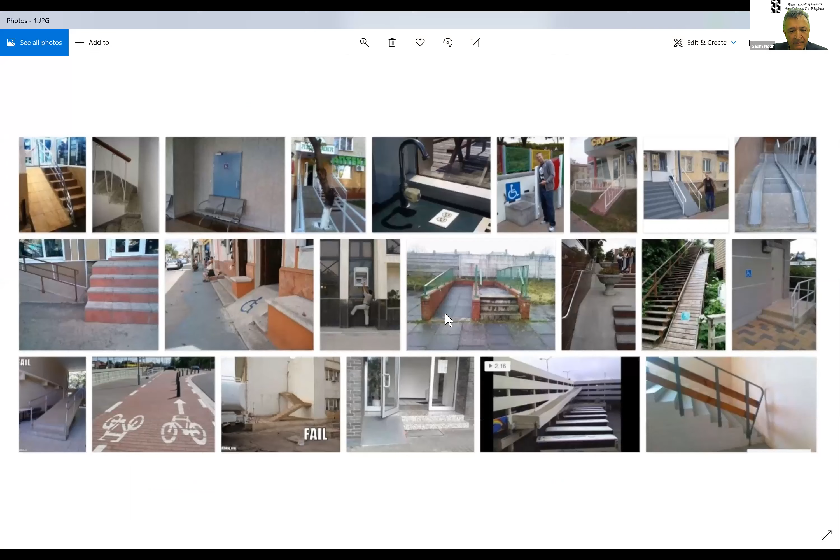I don't think we're seeing the slide you're talking about. Let me verify, I just pulled it in. Thank you for stating that - I'm going to see where I can do this. Share, oh let's go here. Let me see that. I think you can see the photos now. Yes, yes, that's better.

So anyway, these are just fun photos - I literally typed in 'mistakes or errors in construction' on Google Images and it gave me this. Hopefully none of us will ever be in this position, but it simply shows that it can be done.

Somebody will put a chair right in front of this fabulous spot, or you can see bike racks blocking things, creating impedance, and the door placed at exactly the wrong spot. This was my 'Stairway to Heaven' - wonderful slopes, etc.

So this was just one I had to show off, and another simpler one - sorry, Sam, you need to share your screen again. I'm going to find it and share it right here.

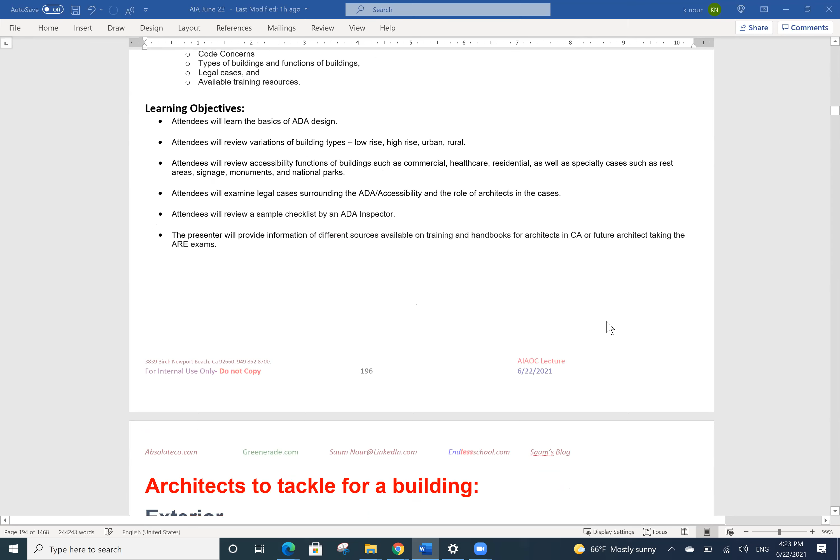Yes, but whatever you were drawing over, we couldn't see it. Ouch, I'm going to do another test. Let me do that because I'm going to be doing that. Let me make it.

Do you see this, the yellow marking? We see the yellow pen. Fantastic, thank you, thank you.

So anyway, that is the part. Then you go through the architects tackling issues on the exterior or the interior.

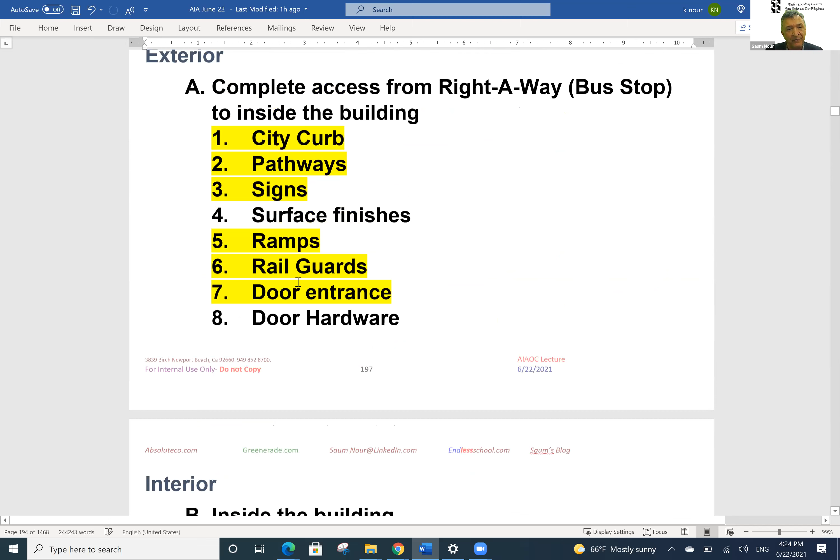There was a philosopher who said 80% of participation in a contest is just being there. So the number one item I'd emphasize is that a handicapped person who cannot drive gets on public transportation, reaches the city curb, and from that pathway goes through the signs, ramps, guardrails, and door entrances to enter the building.

That becomes a major issue. By the way, the word 'right of way' really means the curb. There's another issue in the code that says if you're doing egress path lighting, the engineer has to provide all the foot candles to get to the right of way. The right of way is not the exiting of the building, it's the bus stop. So really it's the street curb.

These are items I am going to be tackling today, hopefully finishing. Of course, surface finishes I am not tackling. There's a small statement about curbs that simply says they cannot be smooth, cannot slide, and have to have proper slopes, etc. The ramp we will be discussing at length, the guardrail at certain levels, door entrances, and door hardware.

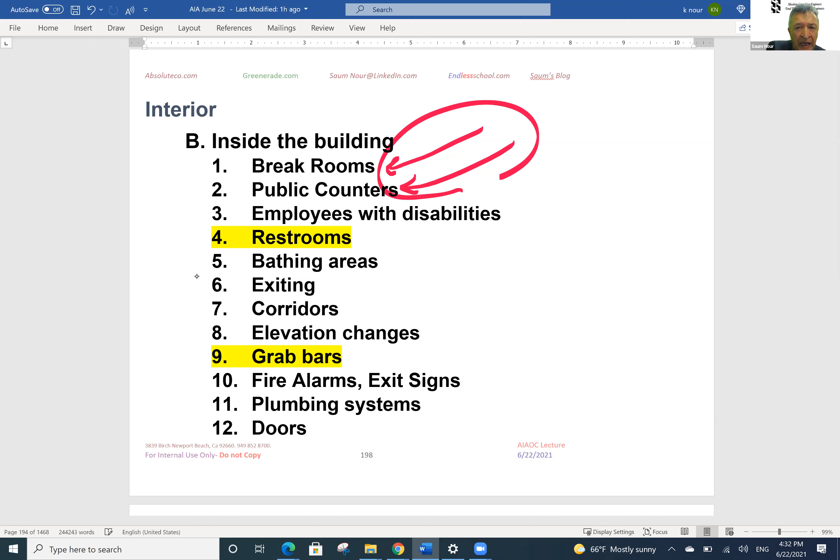Inside the building we have the break room, which I'm not going to address today. Public counters, there's two parts to this. I was doing Walmart for about 8 years, and when we were converting Sam's Club stores, one issue was a concept called equivalency.

Part of the equivalency was the following, however, I need to apologize, I had it backwards. It was Pace that became Sam's Club, and Price Club that became Costco. So when Pace was converting, all those stores were already there.

The issue was, what happens if they hire a handicapped accountant or a wheelchair user who becomes a supervisor, and they couldn't provide access on the second floor? We were building small rooms on the first floor, simply saying if they ever hire a supervisor or accountant, here it is, we now have that proportionality built in. Or for counters, we were adding a small counter for anybody who was handicapped.

They would guide them to that particular counter to do the transaction. Or like many bathrooms or gas stations, where a sign says if you're handicapped, please honk and somebody will come give you service. So those are the elements.

Employees with disabilities is a very touchy-feely issue, and very scary for many, especially at the corporate level. I don't have a picture of this story, but it's on my wall. ABC on Mount Wilson has a tower. They had an individual fixing the towers, and by the way their tower is one of the longest and tallest. I've done literally 1,500, if not 2,000, cellular towers in different formats and places, and this tower was very unique.

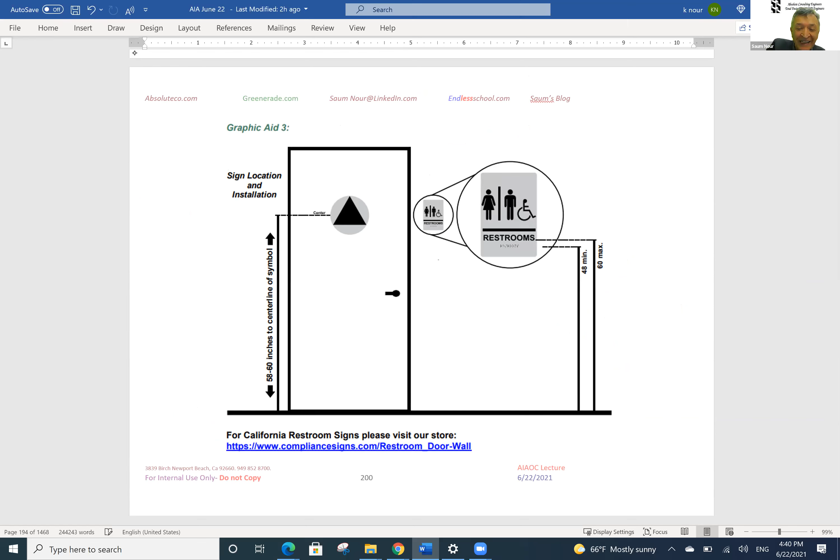But overall, one of the most critical parts, as we all have, is what we call standards. Standards is something that a guy who is here versus Minnesota versus in different states, we all follow the same guidelines. Of course, for example, the state of California doesn't do ADA - we do accessibility through chapter 11A and 11B. So just know it, we do not do ADA because ADA is the standard that federal government gave, and they tweaked it into 2010, et cetera. But again, we follow the guidelines of the state.

So one of the corrections that we see from the architects is that someone says, you're not doing ADA, please take the word ADA out - you're doing chapter 11B or 11A for state of California. So at least let me stay with the following: if we are doing something in Marina Del Rey, or if you're doing it in San Diego or Northern California, we all have the same standard.

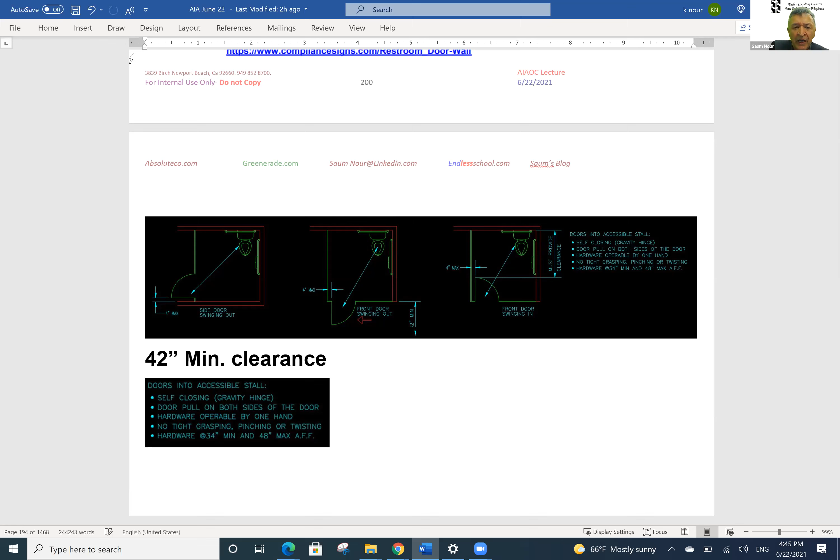So there are guidelines. Now what I did was the following: I took some items, this is for restroom sections, and it simply shows a partition - I don't have it here, I have another one for a single restroom. And again, every time you have the water closet placed inside the restroom, they are always opposite - the door is opposite of where the water closet is.

And then of course, when dealing with doors into the accessible stall: self-closing, gravity hinge, the door pull on both sides of the door, it can go both ways. The hardware operable with one hand, no tight grasping, pinching, or twisting - remember that. The hardware is about 34 to 48 inches, and those are the guidelines. I'm going to continue to repeat that, just make sure we all learn those 4 items. And again, don't forget, if we all live 100 years, we will be in that position.

And again, in this particular case, I'm going to be looking at this thing. The 4-inch maximum is the position you could be swinging through. I'm just giving you the 4 positions you could have - I just enlarged it for an FYI.

Now the other item I'm going to emphasize here is as follows: when you come in, there's a wall hung and floor mount. If the toilet is wall hung, 56 inches. If it's floor mount, mind you the actual drainage is here, that gives you that 3-inch with all the elements. So you got the 56 to 59, just FYI.

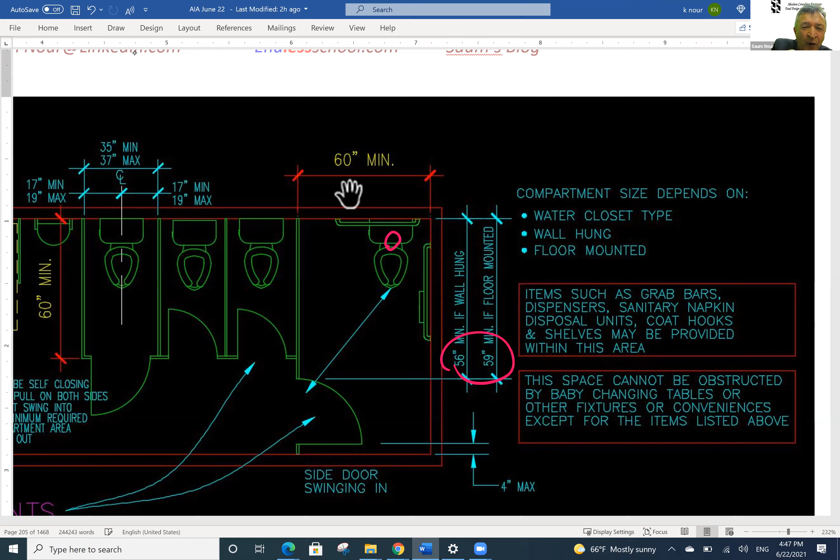The issue - let me open up a parentheses - if it's wall hung, God bless you, make sure this is an 8-inch wall, minimum 6-inch you will squeeze that, very very difficult. But if you do put wall hung, especially on an institutional level, the beauty is the pressure system is far better, etc. If you have the tank type, God bless you, just watch out with the pressures and other elements - this is just a parentheses from other trades I know. But at the end of the day, water closet type, wall hung versus floor mount - if floor mount, remember the 3-inch added to the 56. So those are the 3 items.

Items such as grab bars, dispensers, sanitary napkins, etc. may be provided here. You don't have to, but grab bars are mandatory, and some items can be there, I have a detail for that. The space cannot be obstructed by baby changing tables. This came about because now they have changing tables in the men's toilets too, whereas before it was mostly in the women's. But now that you have it, you want to make sure no other elements can obstruct this area - this area is sacred and must be maintained in that format.

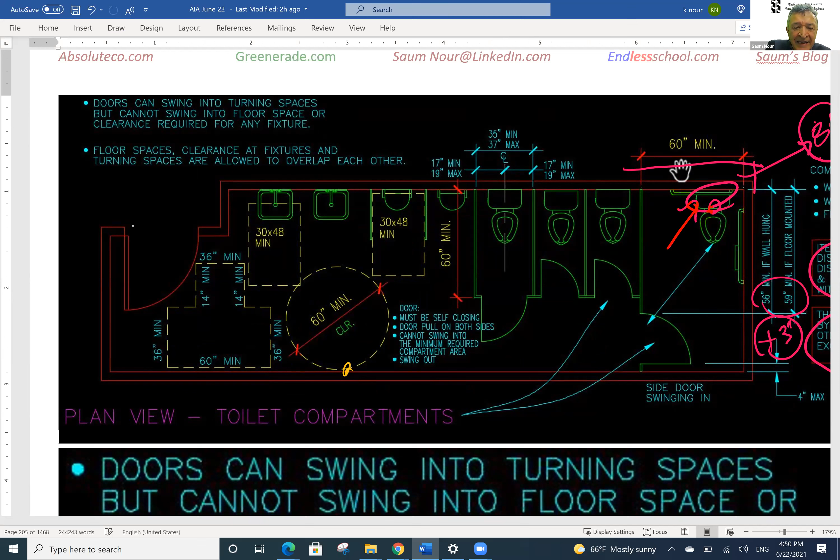Yes, one is your 60-inch round, or you have this particular shape where 36 and 60, you could have either shape as an acceptable turnaround.

The two areas you have is that you really want to make sure these clearances cannot be impeded. At the same time, you are allowed to have a 12-inch overlap of this door with this turning space, and you'll see another slide on that. The doors, again, must be self-closing, pull on both sides, and the swing cannot be within this compartment. This is your compartment area opening. The door must be outside of that, and we go from there.

I'm just going to repeat some of these, only because I wanted to make sure I emphasize these geometries.

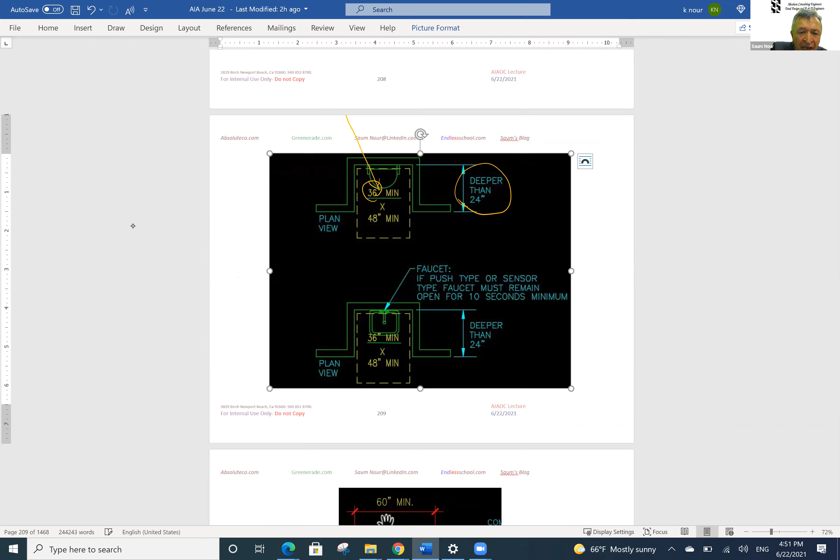Between the urinal and the lavatory, it is 30 by 48 and cannot be impeded with any other clearances. The only issue is if this gets deeper than 24 inches, you have to adjust that 30. That is the modification, just in case you have an odd position, and that would be true for both urinals as well as lavatories. So if it is recessed deeper than 24 inches, you have to go through that.

Now, the faucet, if you have the push type or sensor type, it must operate for 10 seconds. This is a little plumbing issue I just added, just an FYI. By the way, that does not hold for residential.

I just got a plan check correction from San Diego on a residential project, and they cited this metered section. That's only commercial. Some of that is from the green code, and some of that is from the accessibility side.

I'm again repeating this: the 4-inch is always in the opposite direction, 56, 59. Remember the 3-inch, and if you're taking your ARE exam, this ADA reference shows up in quite a number of places.

Now, all of the accessories - there's one item I want to bring up. This grab bar right here has its own sacred components. Again, minimum 33 to 36, and mind you it cannot be lower than this. It would be almost... I don't know what word to use... it would be almost wrong if it's lower, because technically it would obstruct the actual tank.

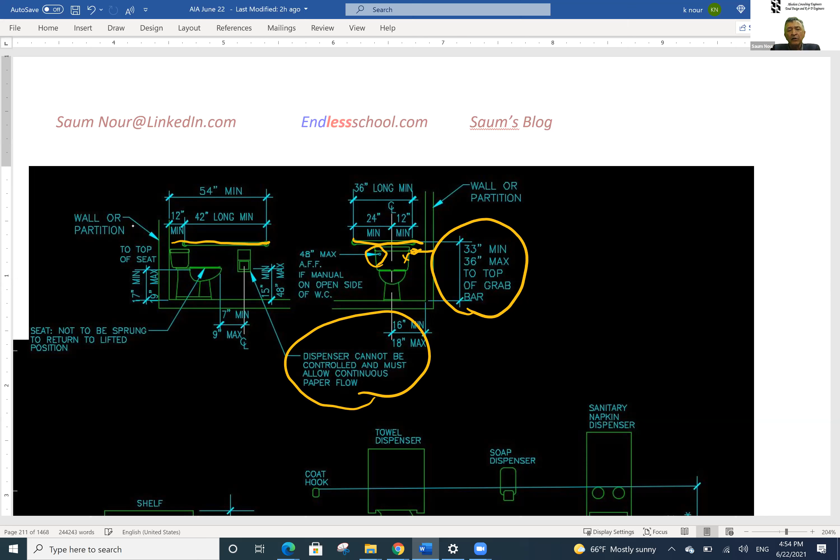The dispenser control simply cannot be controlled and must allow continuous paper flow. That's one issue, and when they are using those giant rolls, I would literally quiz them on this - when the paper roll is extremely large and not being used, it is very difficult for a handicapped person to use, especially on an institutional level. I have seen that become an issue.

This right here, there is a problem. This simply says it has to be a minimum of 15 to 48, but it'll conflict with the handrail, so really you'd better stay within that region. The other item is 7 inches to a maximum of 9 inches - it becomes a very interesting issue.

One more item for you: this simply says 17 to 19 inches. In one of the cases I visited, the following happened - the architect of record comes back, here's the face of the stud, right? FOS. There are no finishes here.

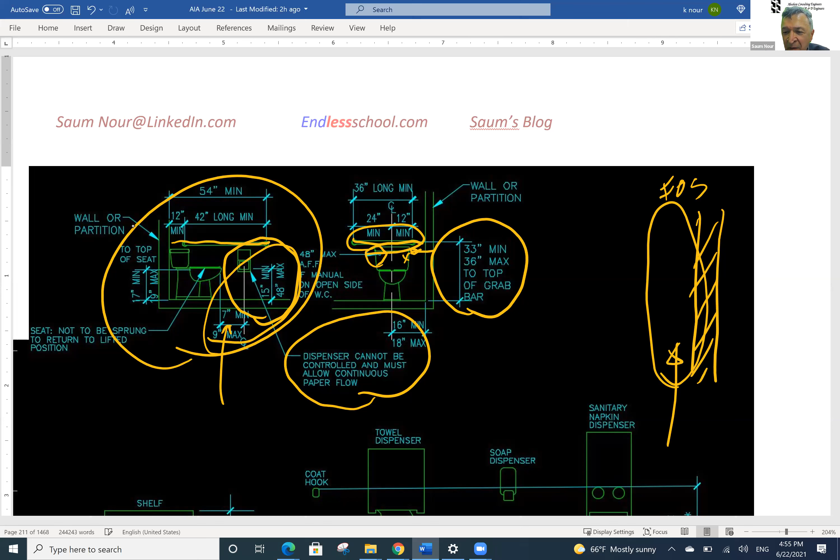Mind you, I am a son of a stone man. All I can say is, depending on what finishes you have, this can grow and grow and grow, depending on whether you have a 2 cm marble or a 3 cm marble, a very light veneer or a very thick veneer. I have seen this go from 17 inches to...

you'll see this right here actually simply just go bye-bye. We did this with an architect, we were working on a high-rise. They had the veneers there, and they simply added on top of the veneer. All of these were against the code, and they had to go back and redo all that work back to the face of stud and build it out. So please, watch out.

And we have seen that quite a number of times. Since I may not be doing the break room, I'm going to bring up a case that I got involved in. Here is the 34-inch countertop, and here's a dishwasher, and here was the floor. This floor was a bare concrete floor. They were able to make this dishwasher go. By the way, there's only 2 dishwashers out there that you can actually have for a handicap dishwasher - one is the GE and the other one is Bosch.

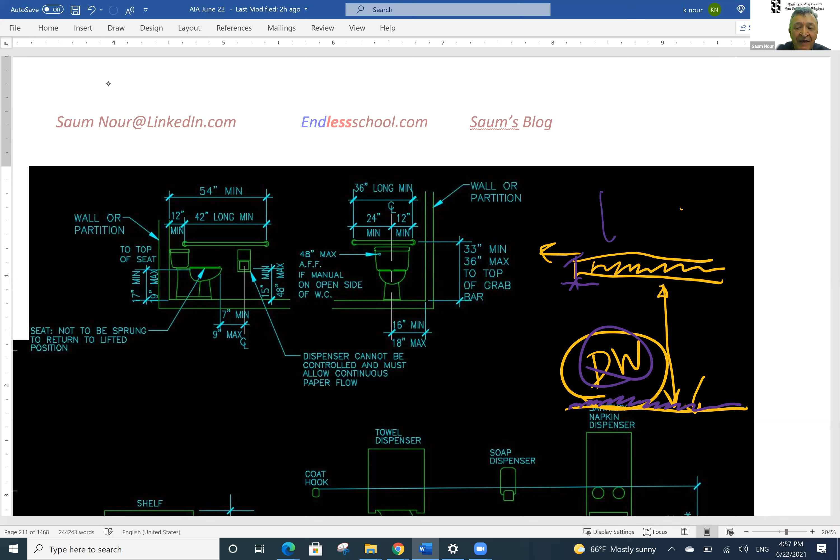Guess what the contractor did? The contractor went out and simply put tiles here. Then this dishwasher, no dishwasher was able to get in, because this 34 is very, very tight. By the time you have those finishes in, it's very, very difficult. That was a monster headache for the contractor - they had to go back and do it. Anyway, this is a little parentheses of a case that I had seen in one of the high-rises.

Okay, so we talked about all of these wonderful stuff. There's one item I'm going to bring out. I know all the architects have these boilerplate details, and they just slap it on there. Please, if you do, modify your details and simply state that this is from the finished surfaces, or whatever these surfaces are, because you've got thin grout, thick grout, etc. Just an FYI.

The other thing that I really like is as follows: when you have bathrooms, please use the continuous grab bars, because if you do that, all these distance issues go away. We did 54 floors of verification, and in many occasions, when we saw this, we knew. When you don't see these, you had to go and measure it, because this comes from the standard.

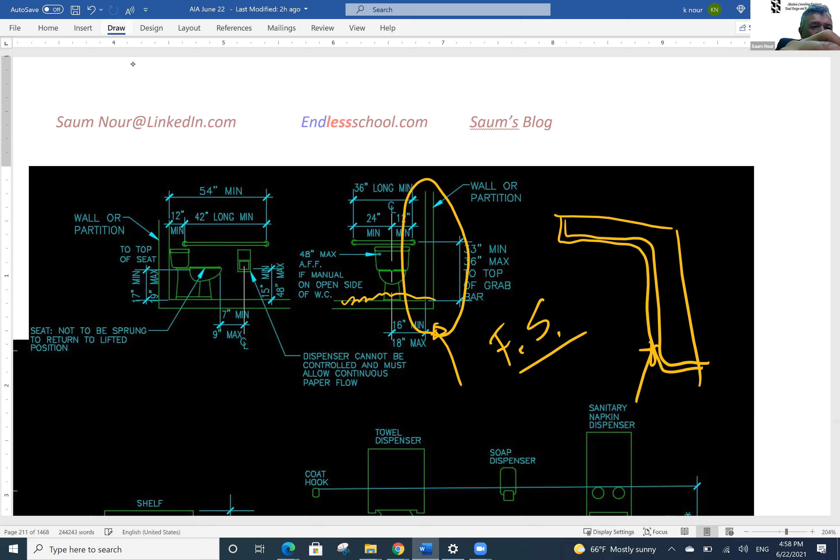I'm going to apologize, I'm going to give you one more quick shout out. Please, the bathrooms - they make the assumption when the bathroom fixtures etc. are made for a 350-pound person sitting on the stool, or about 300 pounds of pressure going on these grab bars. Of course, you have another section of the code that says on a railing it's 200 pounds of pressure.

For the sake of argument, if an individual is 300 pounds and he's pushing his hand onto that grab bar and pulling himself, imagine he has an arm, and the moment that he's causing is whatever his hand distance is plus his weight. Imagine how much moment he is putting. If those of you who've done AREs would know, you're putting a ton of moment. Please do not allow that small little number 10 screw that goes into this.

And there's only 3 of them. If you have seen it, it's right here, and that comes off. Generally it goes through all of these finishes, veneers, and by the time it grabs the wood, the lumber is what we call poco, very small. And you can see all of these go bye-bye.

So please, as an architect, change your details. Again, when I am in the bathroom, I have nothing else to do but observe all these issues and problems. So that's one item. Please do not have, or if you do have those boilerplate specs, please modify them or enhance them so that you do not have those issues.

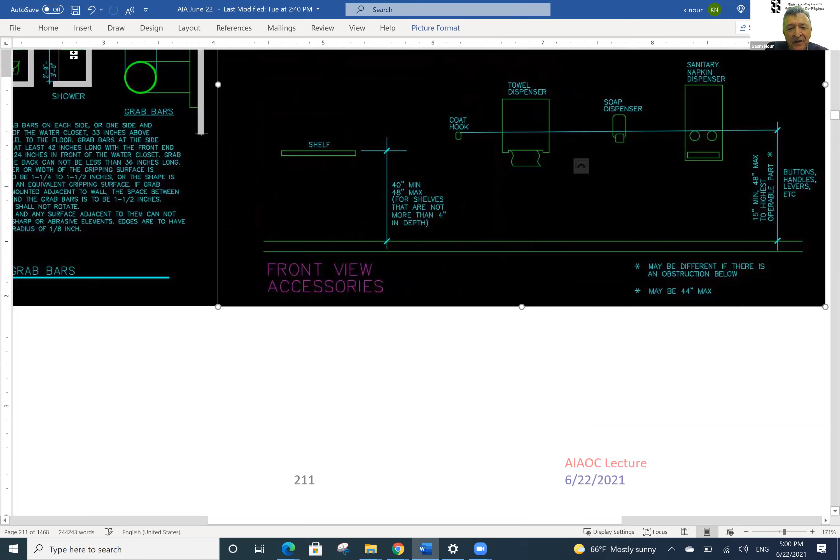So now, these are the other elements which are out there - the sanitary dispensers. Sorry, I'm having fun with my very sensitive mic. Okay, what is happening is as follows: they actually try to discourage you, but again, remember the 48.

You really want to stay away from these issues. If you've got towel dispensers, soap dispensers, coat hooks, and all these shelves, you really want to stay away from those. The only part that actually gets me is this right here: if you are within that boundary, you cannot exceed beyond 4 inches, just an FYI.

Now the grab bars, you really don't have that much choice. The grab bar, whether it's on a staircase or handrails, etc., is the same code and it does not make any difference. I'll just read it: locate grab bars on each side, one side and the back. The water closet grab bar is 33 inches and parallel to the floor. Grab bars are to be 42 inches long and so forth, and they do allow 1 1/4 to 1 1/2 inch diameter.

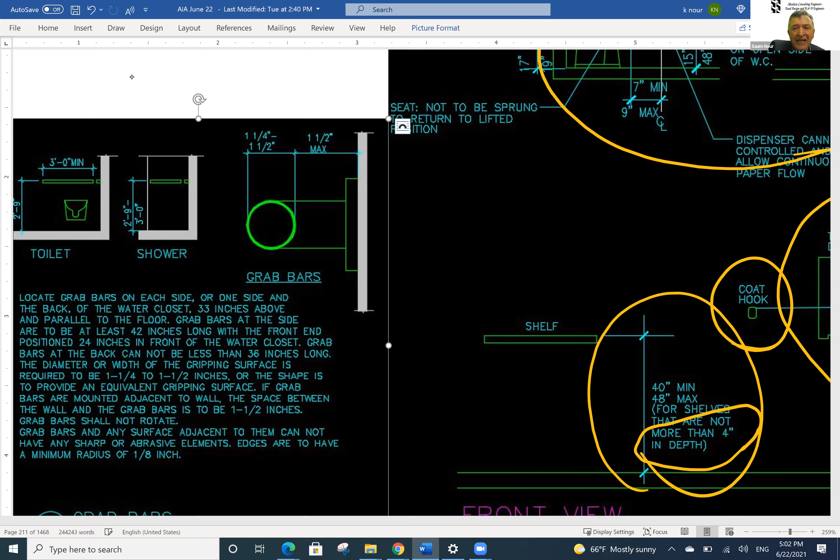Just an FYI, there was one item I'm going to go back to, which I did with another case. I'm going to revisit this for a few moments. But anyway, these I've already explained, and I'm just repeating myself here, and this upper part of the slides was also repeating. I'm going to go to this one right here.

What's happening is as follows: if you have a lavatory, for the sinks, the plumbing industry has already addressed this. The sinks actually have the drainage offset, not concentric or right in the middle. Just FYI, I'm not going to discuss the break rooms right now, but I know one manufacturer offset it and everybody followed suit, primarily so that you can have this area intact. So that was one part.

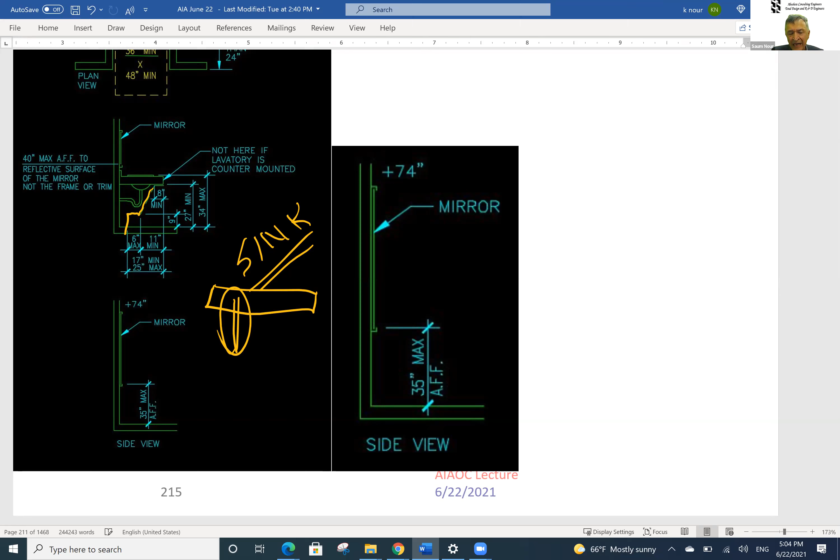The other issue, which I'll bring up now, actually applies for the sink as well. The ANSI standard simply says all of these, for when an individual is going in with a wheelchair, have to be protected. I have several samples - I work with a manufacturer on this issue, and they have to meet certain requirements. I'll give you one example.

Let's say you have a cold water pipe. Should you wrap the cold water as well as the hot water? The question came about because if you're in a rest area in a very cold climate and you have bare skin, you touch that cold pipe and you'll get frostbite. Of course the water's not frozen yet, but it's very cold and it'll hurt the individual. So when you're talking about protecting the underside of all the pipes underneath the sink, you want to make sure you have that for both hot and cold. Hot is obvious, cold became obvious if you have a restroom.

The other issue is all those sharp edges and elements that the plumber leaves - you do not want to get cut on those. So they have protections for those. Now there's one item I'm going to bring up again.

Forgive me, I actually went to ICC in Baltimore for a factory visit. There's ASTM E84, which I highly recommend everybody have for all these protective elements you see here. ASTM E84 is the same thing as the 25/50 standard - for all the elements in corridors, it measures the burn rate and smoke rate of materials that burn. The reason this matters is there are two groups of philosophies: the code simply says ANSI does not elevate and bring in ASTM E84, so there are two groups of thought in this process, and they're fighting each other. By the way, ASTM E84 does not add any cost to the material.

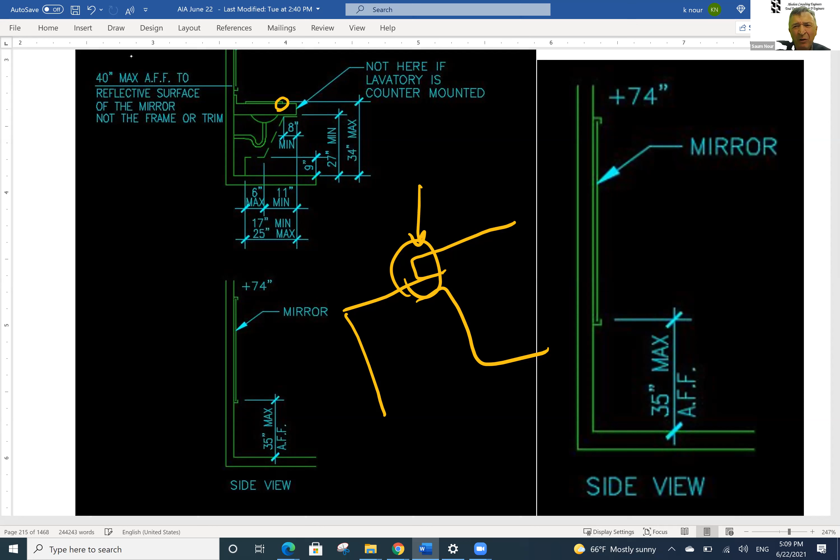I'm going to bring up one word. I do about 3 court cases a year, maybe, and sometimes we never go - by the time we are done, it never gets to court. It's called error and omission. What is an error? Simply, you made a mistake. You put the 34, but you put it in the wrong location. What is omission? You simply don't have the 34, and the guy is on his own. So remember, error and omission.

Now there are many, many cases - you write specification books, etc., and there are many, many dances you do to protect yourself. But the issue is the guy will simply say, you are the architect of the record - someone with a South African accent many, many years ago in court asked me that question, you are the engineer of the record. So if you are the architect of the record, show me that you knew this right here. You are the architect and you recorded this, you drew this so it can communicate between you and the contractor. Or did you simply omit? Each one carries certain penalties and you have to dance around those issues.

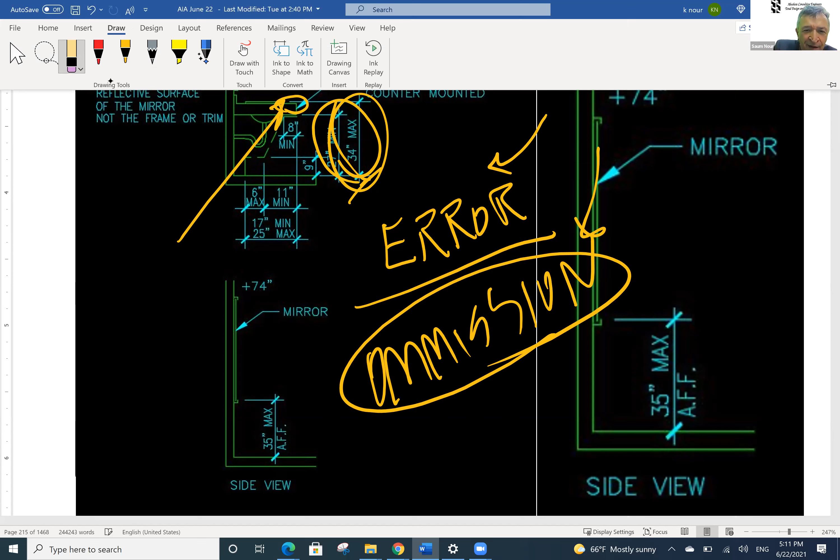But I'm just going to give you the following: that the 34 is top, now top of the actual china. Now, if you are putting the mirror, it's actually to the top of the reflective surface.

So as you know, there is a J hook. I'm actually putting mirrors in my house, a ton of it. If you see the J hook, this is approximately 3/4 of an inch, and what they do is put a little rubber gasket, and that's where it sort of hides. By the way, the rubber gasket is for two reasons. One, during an earthquake this thing can start shaking because, again, for structural reasons, since it's a solid brittle element, code says you can only have that much deflection. So you're bearing that deflection inside that rubber gasket.

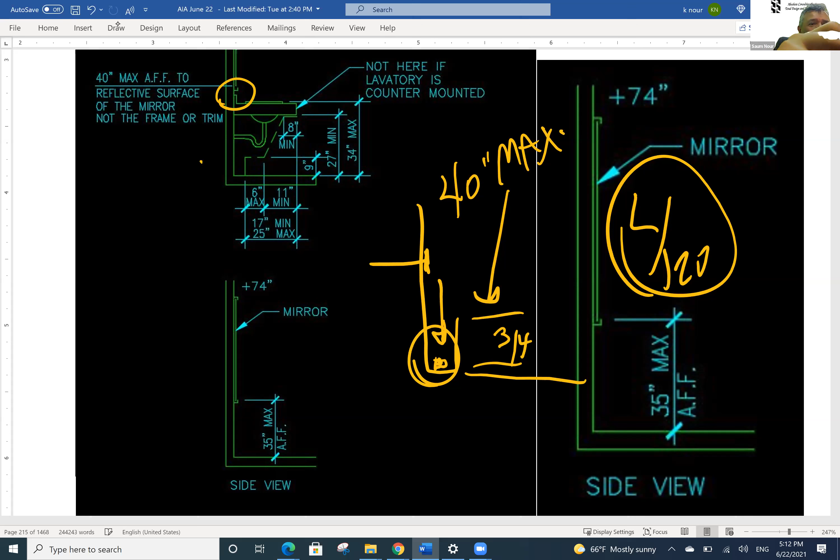But again, don't forget, this 40-inch maximum is from there. So if you put the 40 inches right here, you're going to be in trouble. So just remember, error and omission - did you have an error or did you simply forget? Just an FYI. So now that we are there...

The other issue - I'll go through this in a moment with all those dimensions - is, what about a wall-mounted mirror? Technically speaking, California Chapter 11B doesn't have something specific, but it is for locker rooms. So again, the code says you have to follow something, you can't just wing it. I mean, you can start from 2 inches above finished floor, but 35 inches, that's really on the locker room side, but the ADA actually has it, and everybody is following this - again, measured from the reflective surface.

Now, the reason I wanted to expand a little bit on this issue - there are fancy bowls out there. I was just looking at a home in Newport Beach. There are fancy bowls - watch out with that, because those fancy bowls, if you are going to be there, don't get trapped.

At the end of the day, that ADA person that needs accessibility needs those fancy bowls that go here, and by the way, there is no overflow required. Just to let you know, overflow is not mandatory. Those fancy bowls do not have overflow, that's not mandatory. So again, you have the faucets and all those elements.

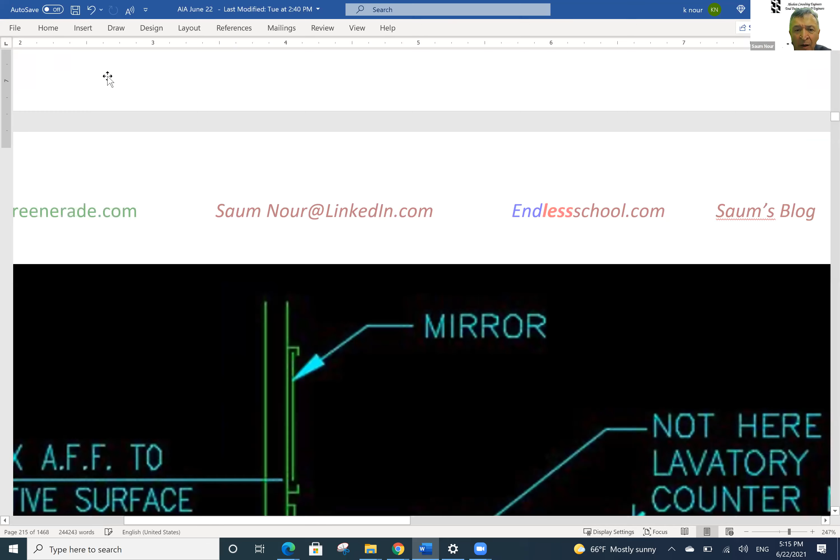Okay, I'm going to move on. I could talk about this more, but I only have 30 minutes before I get to the errors and omissions. And again, this is a blow up of that, I just placed it just in case.

Okay, let me talk about urinals. By the way, here we are not talking about the plumbing fixtures. We have the opportunity when we get there, if not, we are not going to go there for now.

But at the end of the day, if you do have the urinals - mind you, I wanted to take photos of all the variety of the bathrooms that I saw throughout for COVID. That was very, very interesting, just overall, just to let you know. But urinals was one of them that was there.

And you know, let's say for the sake of argument, you were in Home Depot. There was no consistency between all the bathrooms that you were in at Home Depot, or consistency at Walmart, etc. Those were most of the stores that I was visiting. But the one part that you have is the following: at no time, if it's a floor mount...

I made a boo-boo, we end at 6:30, I think - anyway, I forgot, I have to look it up again.

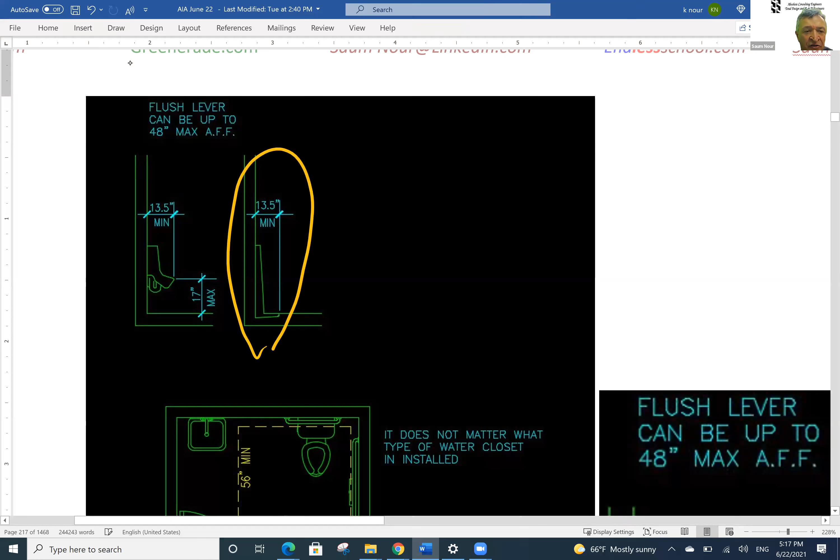But overall, what is happening is as follows: we cannot be less than 13.5 inches that it protrudes outside of the wall. And don't forget, many times these veneers that you have here, if you are going to be changing the elements - especially when I saw the water closet urinals were becoming waterless, I saw an abuse of caulking, it was a mess. But at the end of the day, it cannot be more than that. The maximum for a wall mount was 17 inches, just an FYI.

The Ebola outbreak caused most of these products to be touch-free, and right now touch-free, because of COVID, has actually become more and more common. And there are other issues on touch-free which I will not get into.

But overall, the boundary of this water closet is 56 to 60 inches. As a sacred rule, it does not matter what type of water closet it is, that 60-inch or 56-inch applies. The only issue was, if it was a floor mount, it was 59 inches for the clearances. But overall, that's one of the elements that they wanted to portray.

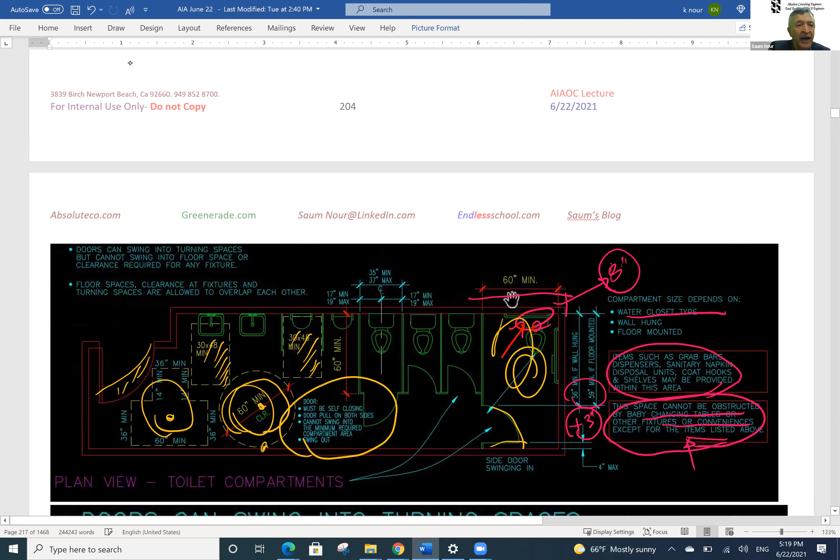There was a high-rise that I work in downtown, and that high-rise was made LEED Platinum. It was the first high-rise before City Hall became the high-rise because of the beacon they put in. I made it Platinum, but one of the issues you have—for God's sake, I was there. I've been there for about 18 years.

All of a sudden there was a correction, and the correction is as follows, I'm going to state it: if you have 1, 2, 3, 4, 5, 6 fixtures, lavatories do not count. I'm certain some of the 40, 45, 46 members know the answer, but I'm going to question it. If you know it, wave hands. Know the answer. The question is this: what happens to the sixth fixture?

Now mind you, if you're in a women's bathroom, you're all water closets. In this particular case, you've got 2 urinals and 4 water closets. What happens is as follows: the 6th one has to be considered as ambulatory. It's a very interesting phenomenon.

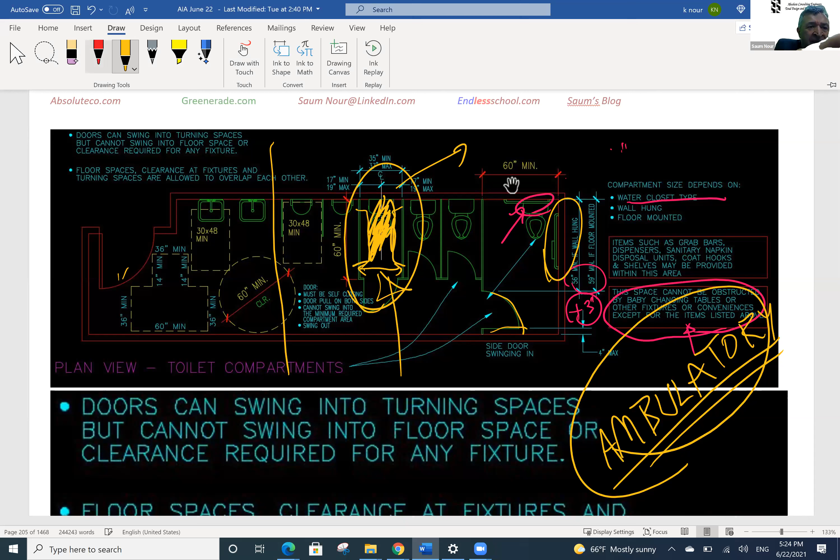And again, I really, really beg you: please go to the ADA, Department of Justice website where they have done all of this. Verify that if an individual comes through with crutches, how many steps the guy has to follow before actually using that—it's really, really intriguing. And what happens if you miss one of those dimensions or one of those items?

There's one item I'm going to bring up again: in the United States, American Airlines has realized that the weight of individual passengers during COVID has increased by 8 pounds. Just an FYI, I learned it today. So they're actually increasing their verification of the weight of carry-ons, etc. They're checking because they have to spend more money on jet fuel for 300 or 152 passengers times an average of 8 pounds—they have to carry 1,000 or 2,000 pounds extra weight of fuel. So either they have to increase capacity or charge people for it.

There was an occasion I was coming back from London, through British Airways, and the guy weighs my bag and simply said—I literally had an artificial arm inside that bag—and he says it's too heavy. I said, not a problem. I took the bag out, took the bag, wore my artificial arm and said, okay, now it's light. He didn't know what to say. He was just numbed.

Just an FYI, that was one issue. Before I go to the next slide, I was getting an X-ray for my teeth, and as the guy puts the shield, the lady says hold this one with your left arm. And now you've got all these, and I couldn't tell. All of a sudden - anyway, the lady was apologizing for about 30, 40 minutes because he didn't see it. But overall, that was the ambulatory cases. That was something that we had.

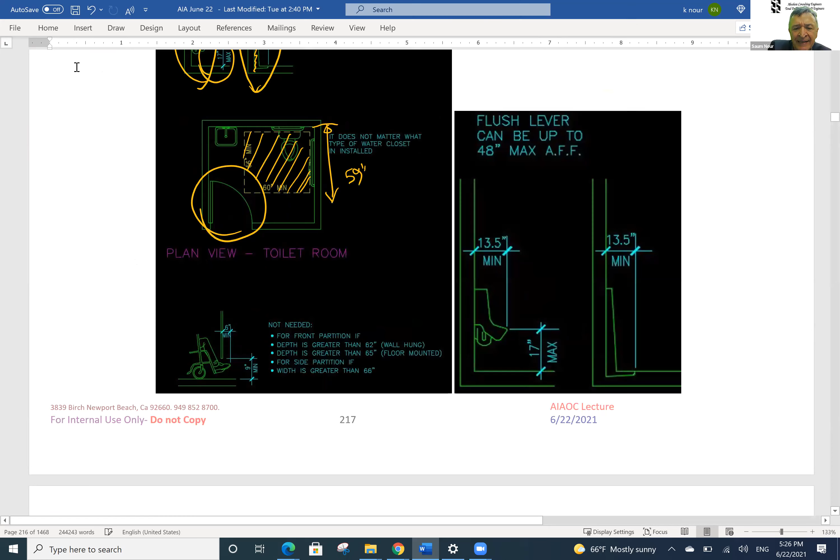The only issue I saw in the high rises - for the break rooms, they have these openable areas. So if the guy is handicapped, he would open the door and go in. Otherwise they'd have these very nice veneer elements so it wouldn't be ugly, but just an FYI. Don't forget, the handicapped person's feet do come out, protruding 6 inches, and he needs that 6 inches for these dividers.

On the other hand, there's the issue of genderless or no-gender bathrooms - remember that case during the Obama administration? Everybody was thinking about how to have multiple sexes go into the bathroom with privacy. They were looking at this issue, and I'm going to draw this. They were actually going to block these off, giving each stall total independence.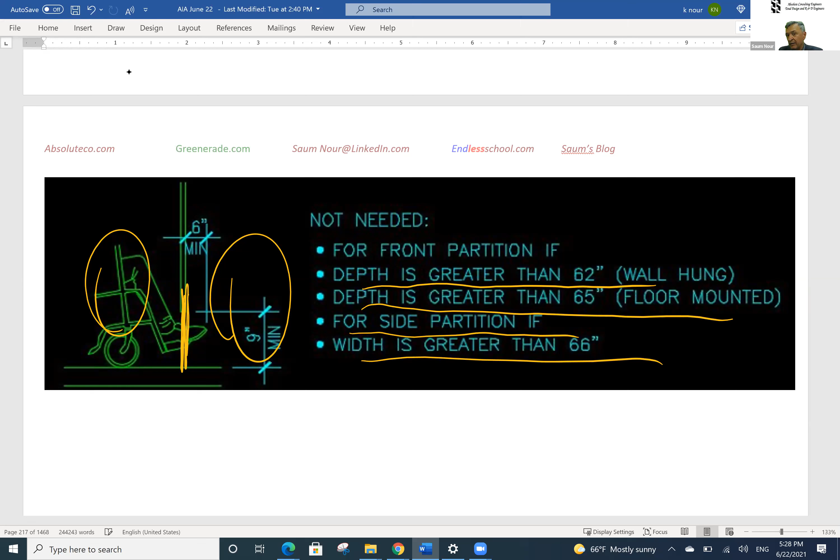However, if you do that, the depth has to be greater than 62, on floor mount it has to be greater than 65. For side partitions, if the width is greater than 66 inches, you can ignore it, but otherwise you have to add another 3 inches to that. So don't forget, this 9 inches was there for a purpose.

We will see those door kickers at the very bottom where you put those metal elements - they use that to push the door as well. So it has multiple reasons, multiple excuses to have them. By the way, philosophers call out body parts as faculties, just to let you know. So we are going to use this, but anyway, I think I've said that.

Now, handrail requirements - you can have variations in handrails, and I have seen multiple versions. I've seen some guys at Hispanic restaurants modify this to look like some sort of Hispanic or Spanish style component. But other than these guidelines, you really have no room to wiggle. Just an FYI, I don't want to repeat it.

There's one part, again in that same high rise - and this was a very good size architectural firm, I'm not going to name them - if you have all these corridors, you cannot have issues for a person who is blind or has very low vision. By the way, if I live to 99 or 100, 110 years, I guarantee I will either be blind or low vision, given our lifestyle, cataracts, etc. I just found out yesterday about my eyes.

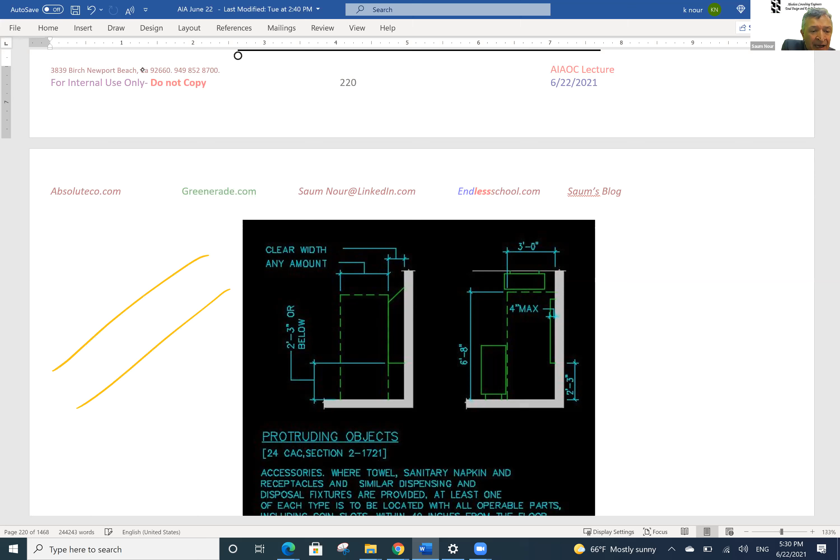So it's going to be there. Therefore, when using a cane to move around, or some sort of bionic element added to our system, we're going to be looking at these obstructions. Remember the staircase I mentioned that somebody sent me, and I haven't gotten the job yet - you're doing this staircase that goes in, there's a landing, then it comes back. There were no obstructions here for that 80-inch element. There was none. So let me leave it at that.

So what's happening is you cannot have anything next to that wall protrude more than 4 inches. You have to have that 4-inch maximum element, and at the same time 80 inches to this element. So if you're telling a blind or low-vision capable person here's the pathway for you to exit, you have to maintain that 80 inches by 3 feet, with a 4 inch maximum protrusion out. So you have to have that clearance for protruding objects.

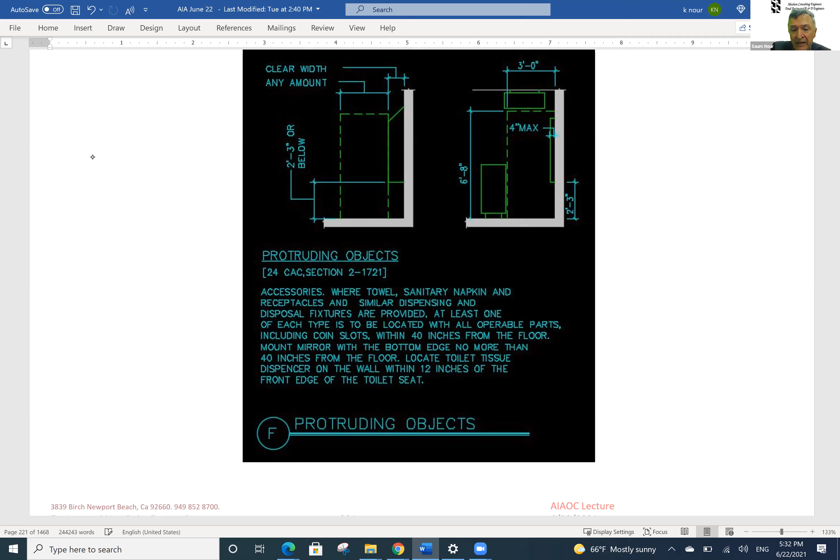So now we go down. In any case, I have other examples from different places - I wish I had time to show you some of the videos, but I'll let that go. Again, I'm trying to raise your consciousness that you're not just an architect. Remember, we all make mistakes - a blind person, a handicapped person could make a mistake as well. But we have that obligation to meet that section of the code, 2-1721, to make sure the protruding objects do not go away.

Now, there was one very interesting item that I saw in Japan, in Tokyo - this was very interesting. I saw it in one other country in the Middle East as well. What is happening is this.

In Japan, what they have done is that the bricks have directions. So if it comes about, and this is a main train station, and there is a major divider here, it shows multi-direction, and he can identify that here there must be a major directional change, etc. But that was very, very interesting. We do have protruding objects that we will see for the outside, but it was very interesting that a blind person does not have it here. A blind person could actually be given a guide through the train station, where to go, and if there was going to be a major terminal here and there. I thought that was very interesting.

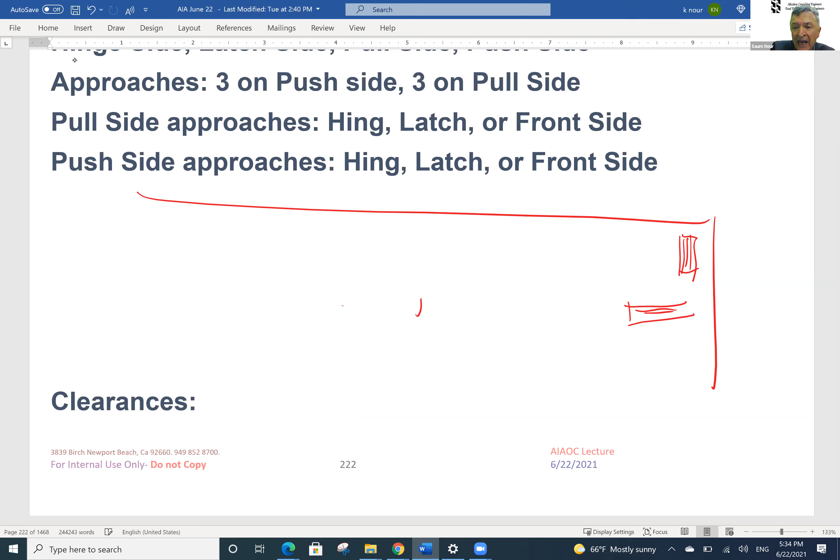I did take a photo of it, but that was a long time ago. And it was very simple, very simple. I am certain that they have standard guidelines, etc.

So now we are at the doors, and there are multiple components. If you're going to be talking about a door, this is the hinge, this is the latch.

So the hinge side, the push side, the pull side - this is the push side, this is the pull side, this is the hinge side, and this is the latch side. Okay, so if we simply have this nomenclature, there is something else that I'm going to add, it's called closers. We'll talk about that later when we get there.

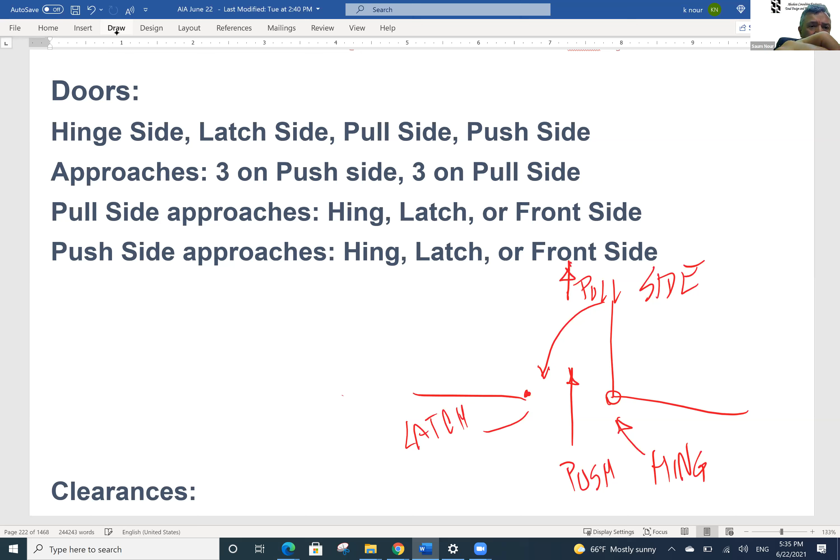So what happens is the following: there are 3 approaches that you have on the push side, and 3 approaches on the pull side. Now, you could have the approach on the hinge side, latch side, or the front side. So if this is the front, sorry, I'm going to change color. So this is the front and this is the front. And then of course, you're approaching from this side, from that side, etc.

So the nomenclature is once again very simple: hinge, latch, pull, push. So you have that, and then latch, hinge, etc. And then you have the approaches - you've got 3 on this side and this side, 3 on the push side and 3 on the pull side. And again, I'm just going to put one more nomenclature, and we are going to call this the front, and we call this the front. So those are different permutations that we have, and each one of those has the dimensions associated.

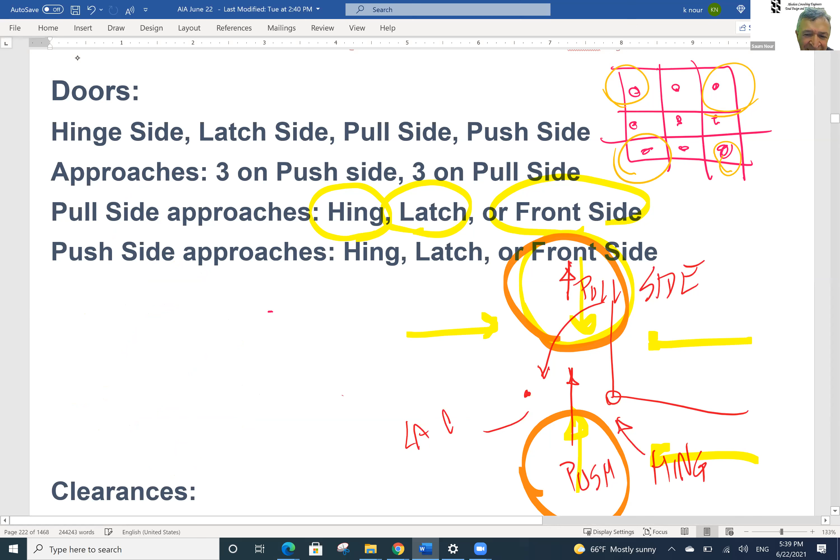So if you talk to your contractor this way and he picks it up, slowly we become a uniform society with one language. If you watched Saturday Night Live, it didn't matter what you asked for, you were going to get a cheeseburger. Remember that.

Clearances. I actually wanted to pick up different places, and I simply said, let it go, I'm just going to go pick up from the code book. I had different ones from different places, but these are straight from the code.

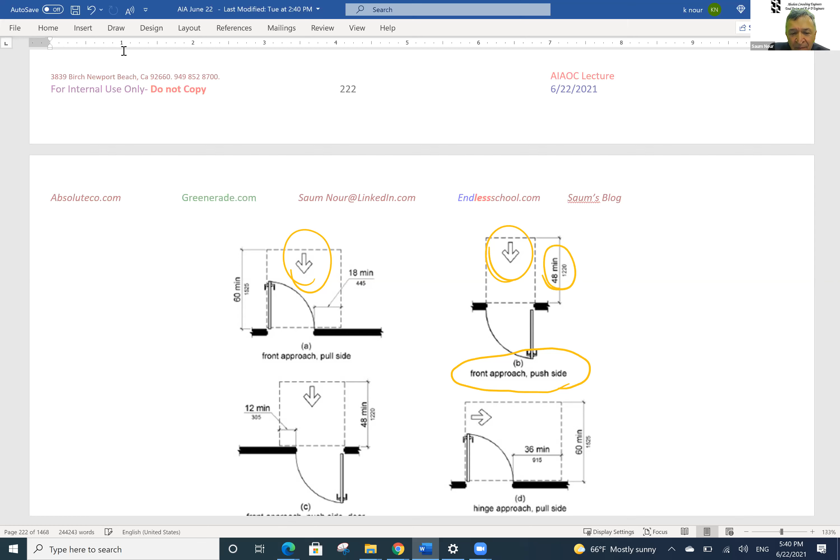Now remember the following items again, I'm going to repeat them. This is a front side approach. If you're simply coming in and pushing it, you open the door, your body, your legs, your machine, your wheels will push it. It's only 48 inches, right? What happens here?

Look at that. If you have a closer and a latch, now you have to exercise and do maneuvering, and that's where the 12 inch is born. The 48 did not change, but this is required for more maneuvering. The guy comes in, opens the door, now he has to press with another hand, has to reposition himself, and now slide through.

That's one of the reasons I really hope you all can not watch Netflix and watch these videos instead. Maybe I'll put all of them with a hyperlink into my phone. And as you're waiting for your wife to come back from shopping, aha, honey, I know what to do now. So you go from there.

So again, you see the similarities between the two. We pick up this too. You see the sisters, how they have sister together? It's because of the closer and the latch. If it doesn't have a latch, it just opens like restaurants, bars, etc. You go through, not a problem. So now that I've covered that, let me go to the other ones.

I am trying to find out, there was one item that I learned a long time ago in history, it's called roots. If you know the roots of every one of these, where they come from, you will become, as in the movie Matrix, able to combine all of these into little zeros and ones. Before you get to the client, you know them all. Before you see the plan checker, you know them all, and you can hit and do a jackpot.

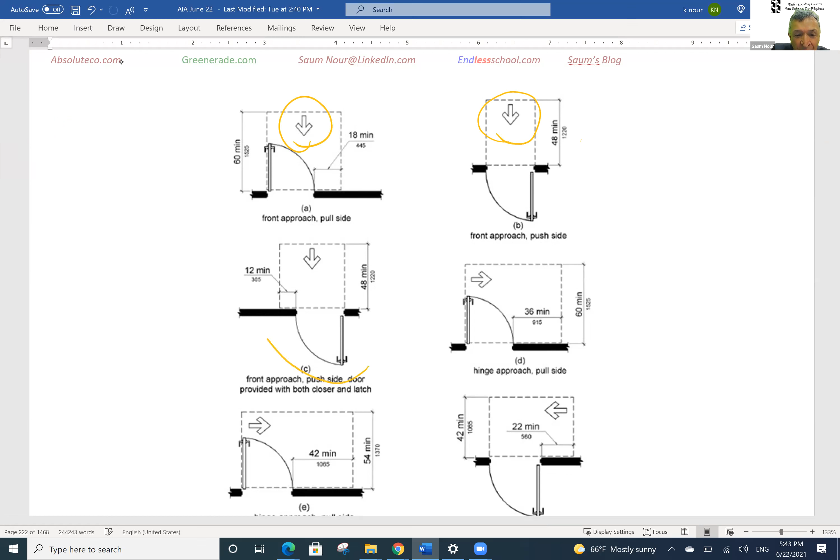Now, remember, let's continue with that thought process. You see the front side? That was on the push side, front on the pull side. You're opening the door, right? Now the difference between this format, where you are pushing front push versus front pull, lo and behold, 18 inches, that's where they came in.

Remember the 12 and 18, everybody's brother or sister knows this, or even their grandmother, call your grandmother, they know about the 60, 18, and 12. No questions asked, the question is why. It's because of the amount of force the individual needs and the amount of room you need, another 12 inches for maneuvering. He has to pull, actually take the wheel out here, and then he puts his leg here. He maneuvers with one hand, and then he pulls and opens the door. And mind you, all that pressure at the same time, because the door closers are there, he still is holding this door.

Okay, so that's the critical part. And don't forget, of course, your door handle must be proper. You do not want to put that in there, because it's like me, I have to put my cup down, my water down, open the door, hold the leg, and then open the door. Okay, now we got that out of the way.

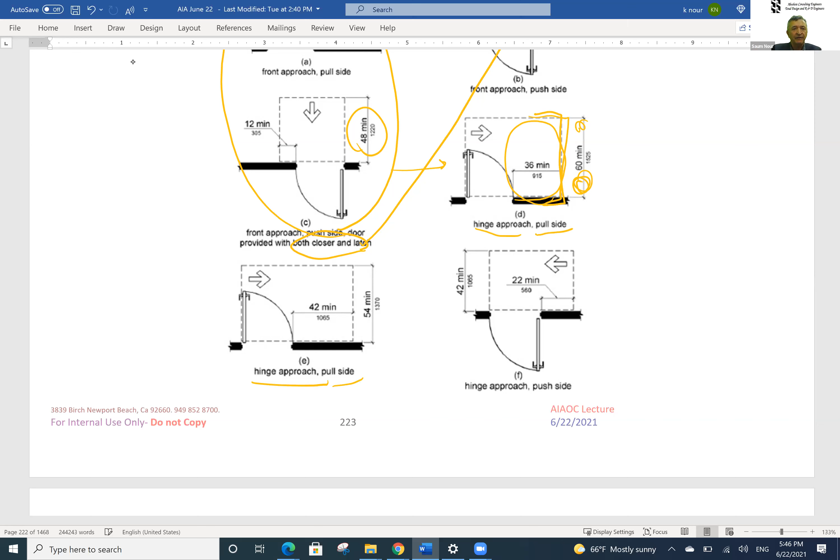Pull side. There's one item that is sort of missing. I have it, sorry. I almost lost it. Now, I am going to draw a little wall here and there. Sorry, my drawing's not as good as you guys. Let's say there was a wall here.

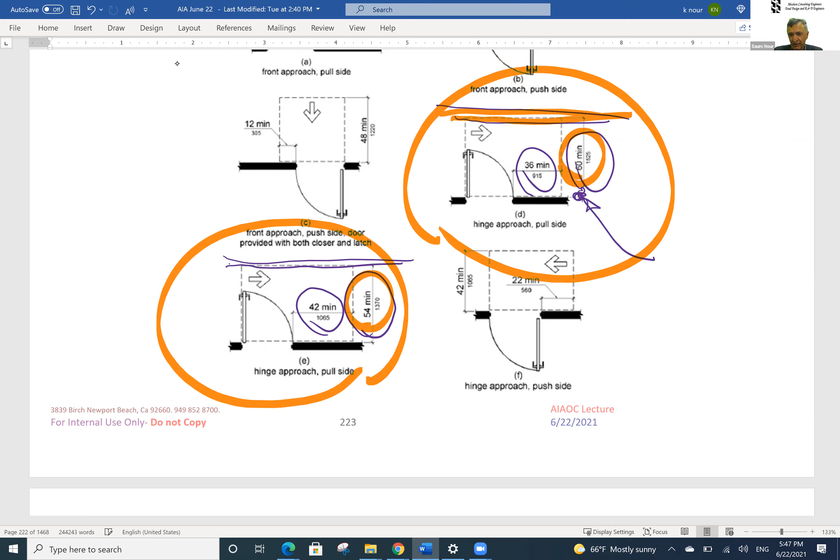There was a wall here. If the wall is there and you have 60 inches, God bless you - that is 36, and you can go ahead and put your statue or award right here, or build something. You can do whatever you wish. But if you have only 54 inches, your maneuvering becomes more. You want to compare this with this. The difference is your 60, see that 60 and that 54.

Okay? I am trying to simply say, remember, if you had all those permutations, I added 3 more permutations. Does it have closers? Does it have a latch? Either of them will trigger this. At the same time, if the spacing that you have is 60 inches or 54 inches, okay? Thank you, we move on.

I am not trying to ponder on this, only to show you how these differences came about. At the end of the day, if you know where they come from - if anybody can put it on a snap in the chat room, where the 44-inch minimum access came from, I don't know. If you were here, I would have given you some cookies or something. I don't know how to do it through Zoom. Or maybe I'll guide you to use my...

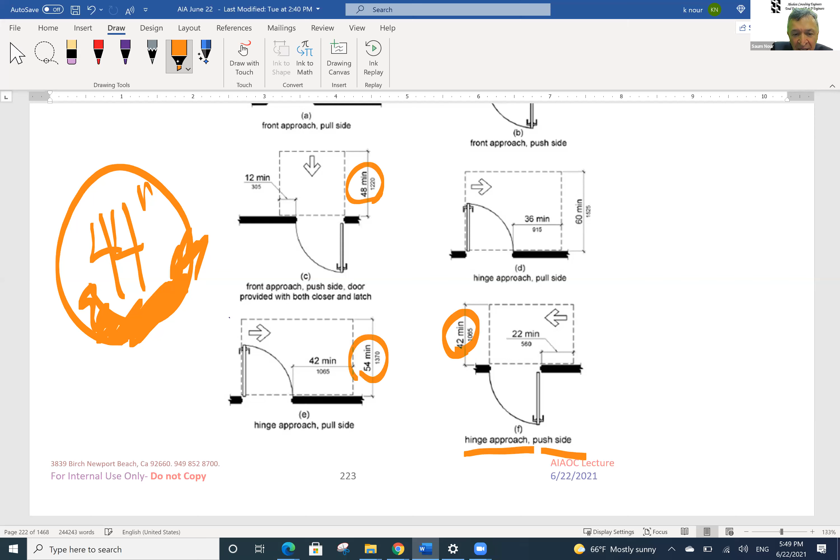So now, this particular case, you are doing a hinge approach and the push side. Look at this - the dimension actually went down to 42 inches. Remember this? This was 48. That was 54. That was 48. This becomes 42. You could actually have a 42 corridor and a 22-inch minimum. Again, you're pushing it and you're moving forward.

Now we have that. Guess what happens? Slow, look at that. The difference between this and this - you still are doing a hinge side, this is a push side. You're doing a hinge side and a push side. Lo and behold, what happened? 48, because of the closure and the latch. Again, the distance is required not because the guy has a lot more muscle or has less muscle. The individual has to carry himself through that machine, right? The issue is closure and latch will create additional space. So the 42 became 48.

Okay, you're done with that one. Now you're coming on the latch side. This is the latch, remember? You're coming - this is on the pull side. It is 48 inch, you need 24-inch minimum. So you can put a little statue here, but it still needs a 32-inch clear. By the way, if I don't get time to put that in.

If you have a corridor and this thing is 32 inches, you can have it for a very short distance, 24 inches, but otherwise it has to be 36 inches. By the way, a 36 door is actually at best 32 or 33 inch because of the door jambs, etc.

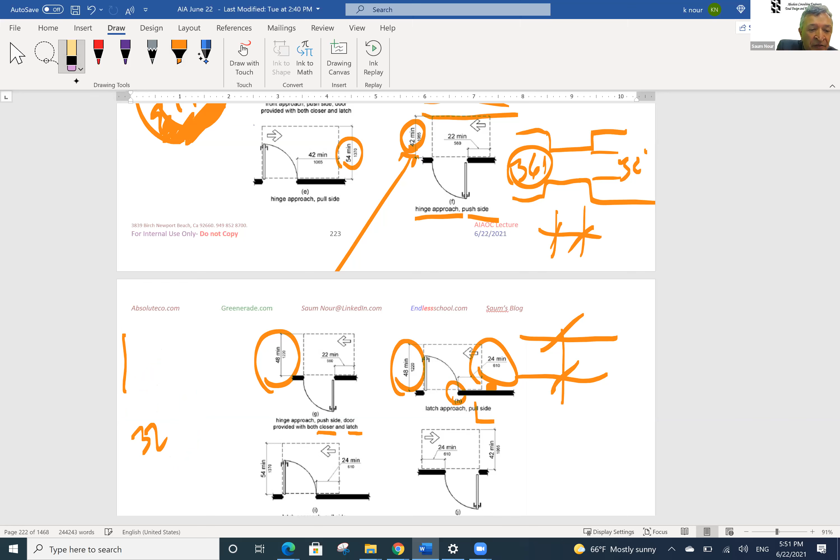So all these companies building stuff modular to bring it into the building, whether it's furniture or a motor or an engine, they all fit that so the guy can put it on a dolly and it goes to the 50th floor, change a pump, bring a chair, bring whatever. Or they go to IKEA, micronize it to the nth degree, and 5 days later you have a chair. So just an FYI, that's how the 32 became a guideline to all manufacturers.

So we just picked up one more item there. Let's move on to the next one. We are comparing one to the other, what's transpiring one versus the other. Again, where we are is the latch side pull, right? Latch approach, that's the latch, you're coming in this way. The door is actually pulling, this one we are pushing.

Because we are pushing, the distances are shorter. However, in both cases, 24 inches is the minimum required here and here, but one is 48 inch and the other is 42 for the corridors. Again, assume this dashed line is an imaginary wall. That's 48, so remember that.

Now guess what happens when you add a closure? 48 inch becomes 54 inch. 24 inch does not change, does not change. So if you're going for the CASP exam or trying to take your ARE, or you want to be a wizard in front of your clients, that's 42 because of this, you can memorize all these.

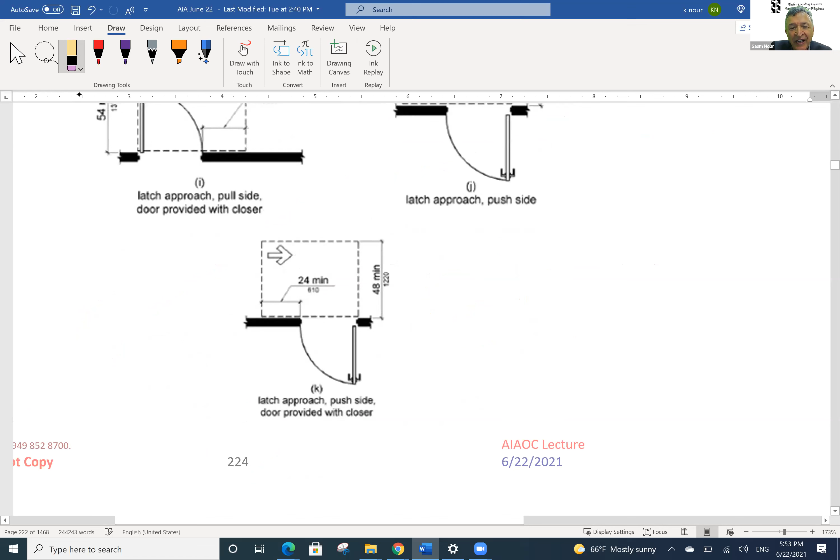But there is a table. I'm going to cheat and tell you what table you're going to be using at the end of this. And last but not least, I forgot this one: the latch approach push side door with a closure, and that's still 48. Again, you're comparing it with the pull side, which was 54, and this became 48, versus 42 versus 48 because it has the closures, right?

By the way, just to let you know, all closures are hydraulic. They have an element, a little screw you can adjust for how much pressure it needs. And by the way, the actual instrument to verify that you have a 5-pound pressure is very cheap. I think every architect should have it just to verify, or if you're in a building, you could always check it out like an inspector would verify.

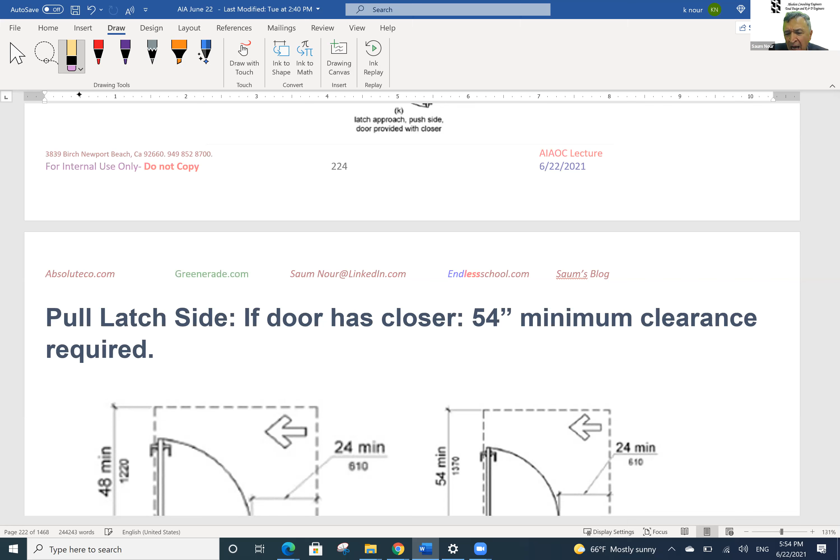Anyway, I've gone through all of these permutations. I just want to let you know again that closures require more load, therefore more. So the same two items, you can compare them, and it goes on and on. I think I've exhausted that to the nth degree, and I will just move on. I'm glad those were close together so we could do a comparison of one to the other. So this just repeats the same thing.

Now, there's one item: there are cases where the doors are recessed. If the recess is more than 8 inch, what happens? You can only do the following: you technically become only a front approach. You don't have a latch or hinge approach, etc. In both cases, you are now on the pull side. On the pull side, you go back to the original case of 60 inches and 18 inch here, versus 48 inch and 48 inch, and you go from there.

And don't forget, you do not need the 12 inch here because you're passing through. But if you do need to have a closure, guess what? You have a closer and latch, now you've got the 12 inch.

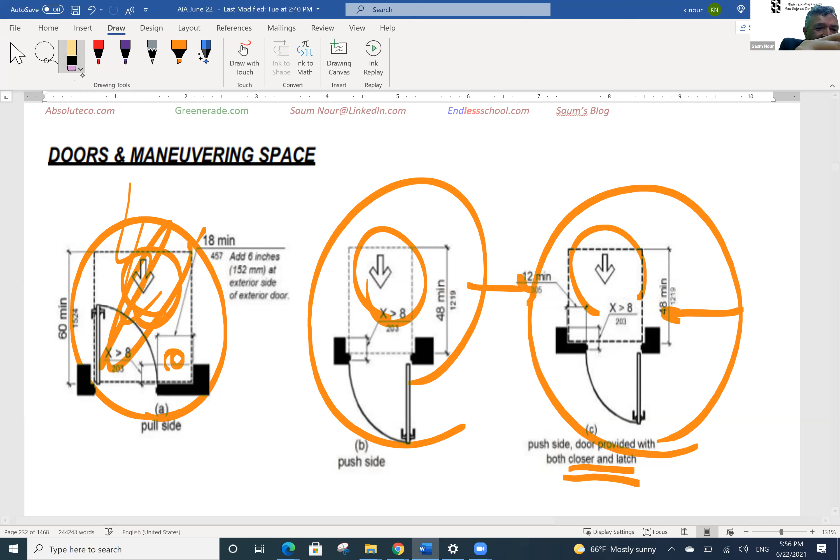Now, this is where I like to bring in the high rise that I'm working in. I've been there 20 years now. Come on, eraser. Okay, my eraser is working.

What is happening is, don't forget, the building started being occupied in 1963. It is at this position and there's no way, there's no means and methods. There's a giant air shaft right here that you cannot do anything about, and there are giant elevators here. So there's nothing you can do. So the only solution is automatic doors.

Now there are multiple ways of automatic doors. There are those called assist, and those which automatically open. Assist are two ways, three ways now. One, the motion sensor picks it up and opens. The other one is a push button.

And the third one is that slight touch to the door, it opens the door. There are those 3, okay? So the maneuvering components are there, and that's the case.

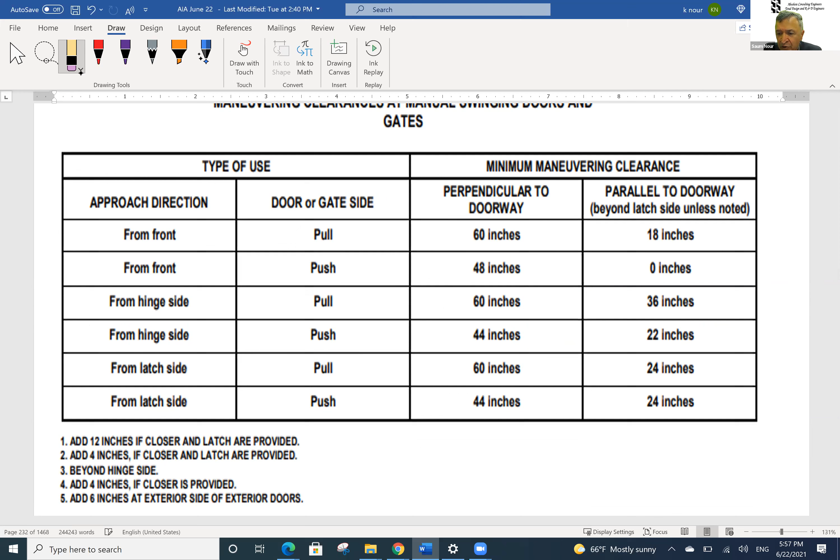Of course, it was more graphical, and it took me 30 minutes to get over it. But one of the items I have is this. Remember we said about the 32 inch. The average standard adult side wheelchair is 27 inches. Therefore, 32 inch is okay. Stay with that.

Now, this is an issue in multiple formats. One is called the high heel shoes. I cannot draw a lady's shoe, but here is, I was working on a Fairbanks School District project.

High toe or high heel toe is about 1/4 inch. This has to be, I forgot, it's either 1/4 inch or 1/2 inch, but they promote all your floor grates to be 1/4 inch, not 1/2 inch.

However, if you have an element, some sort of trench grates, etc., that you have to put in for rain or whatever reason, I'll leave you with that. They're looking at 1/2 inch maximum opening, but I would go with 1/4 inch because, again, you do not want to have Jacoby & Meyers call you, okay?

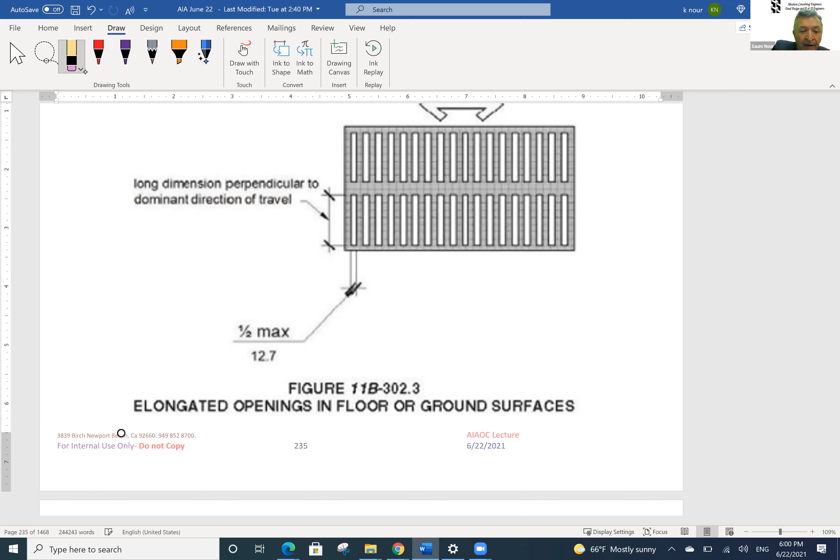Do not go with what's here, okay? You do not want to - there is something in the court system called prudent avoidance. Design it in such a way that if it happens, in nuclear we call it fail safe - even if it failed, it was safe. By the way, with 4 degrees that I have, 3 in nuclear, all I can tell you is that nuclear makes you a chicken.

It really scares you. And that's one of the reasons I really got onto COVID's probability analysis of this and that. It was wow, it took me back to my nuclear days.

Now let's go back. You have multiple types of doors - of course, sliding doors. Sliding doors, watch out, because I've been fixing my own. The elements on top here, I'm sure all of these, there are very, very few places you could go to get replacement parts, especially if they came from Europe. You can kiss that goodbye, and you've got to go. And then once you do that, the railing has to alter the whole system.

The next thing you know - and don't forget, if you go to my plastic seminar, all plastics go from plasticity and they go to what's called thermoset. What that means is if you look at the dashboard of your car, if it's stuck in, say, heat, they start brittling and they keep breaking. So they lose the plastic.

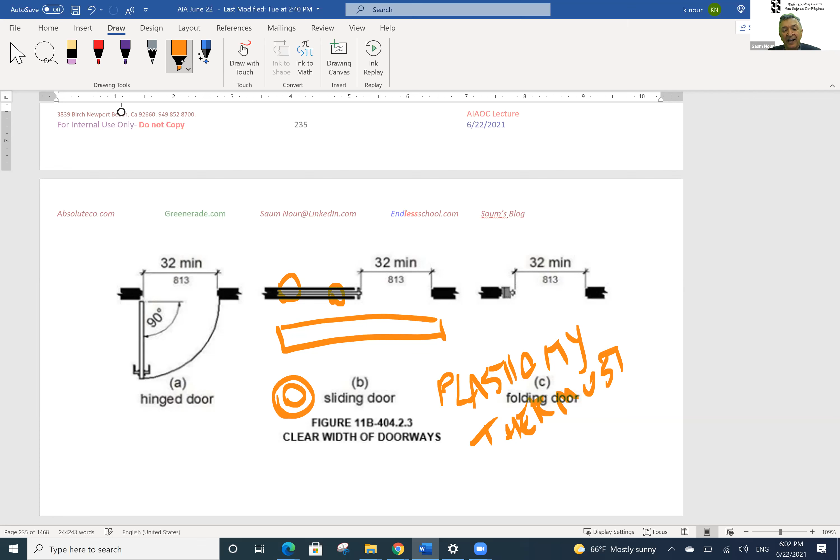So all of these wheels, you can kiss them goodbye in 5-10 years, depending on the temperature. If you're in a warm zone like Phoenix, these plastics will be gone in 5 years.

And so if you have this - I have a lot of experience with these doors. So to go back to this, the door, if it's a sliding door, a folding door, whatever it is, we don't care. What's important at the end of the day is 32 inch in the final position. You can't squeeze it, you're done. Same here and same here.

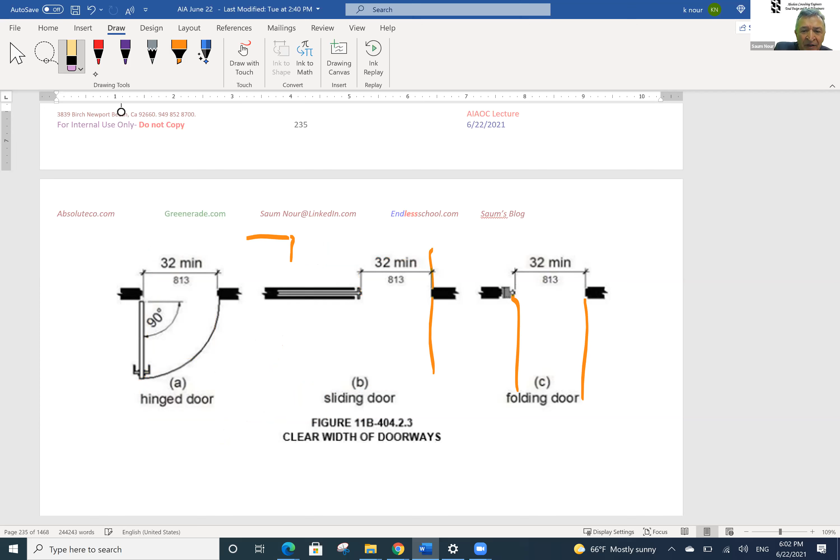And mind you, your 36 inch door, by the time you're done with the door jamb, shimming, and all of that, you're going to get barely 33 inches. So just FYI. So the doors, that's one item. I don't know if I have it on the hardware - I just don't remember now, but we'll see. The other issue you have is the following.

When you're going from one space to another, I've done medical buildings with vestibules. These have a distance for other reasons, and volume-wise must have certain depth, especially in a climate where wind and cold are factors. You'll have a vestibule in front of large box buildings, like Walmarts. Regardless, you must maintain 48 inches depending on the format. As an architect, if this is an egress, depending on occupancy you may need panic hardware or not. This could simply be a different environment, just a corridor where an individual wants to go from here to there. Mind you, that's 48 inches.

These have different applications and different forms. If you're in a medical or pharmaceutical setting, this could be an area of refuge or whatever format, just know that. But for the sake of argument, 48 inches from the tip of one door to the other door.

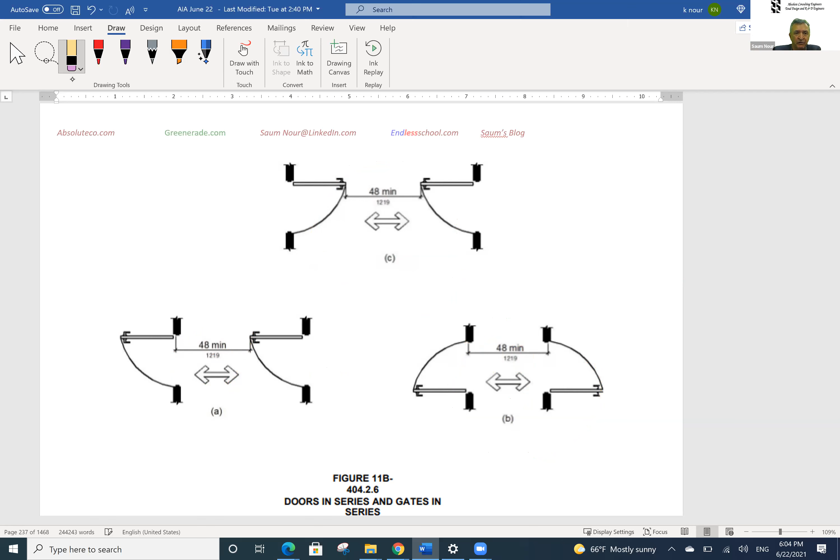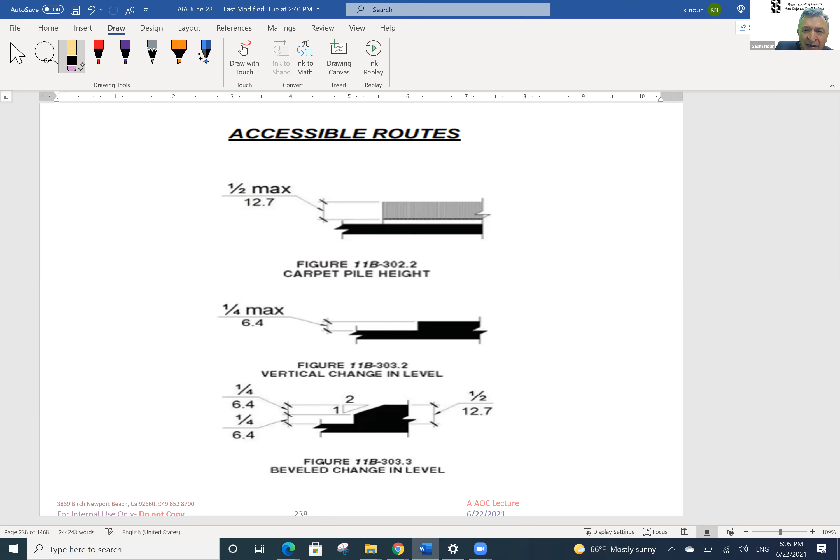Now, this one is very interesting. A handicapped person can only uplift himself half an inch with a bevel system. If it was a perfect half inch to that door, the only place where a half inch is okay is when you have carpet pile height, but carpet is a flexible element. However, if you have a solid surface like terrazzo, a half-inch bevel is primarily for steps, changes in level, and to keep ants from crawling into the space - you'll have these bevels. All of this is calculated based on the individual being able to push his body weight through. I can talk about whether the wheelchair was lubricated and has no friction, but that assumes he has a brand new wheelchair. Or if you have a door stopper, remember the maximum is 1/2 inch.

If you recall, we said the only maximum allowable threshold height for an individual is 1/4 inch. So if the wheelchair rolls back, or goes the other way, at a slope of 1 to 2, and that's just the threshold.

I'm just going to read it: thresholds, if provided at doorways, shall be 1/2 inch high maximum, raised threshold, and changes in level at doorways shall comply with those two sections.

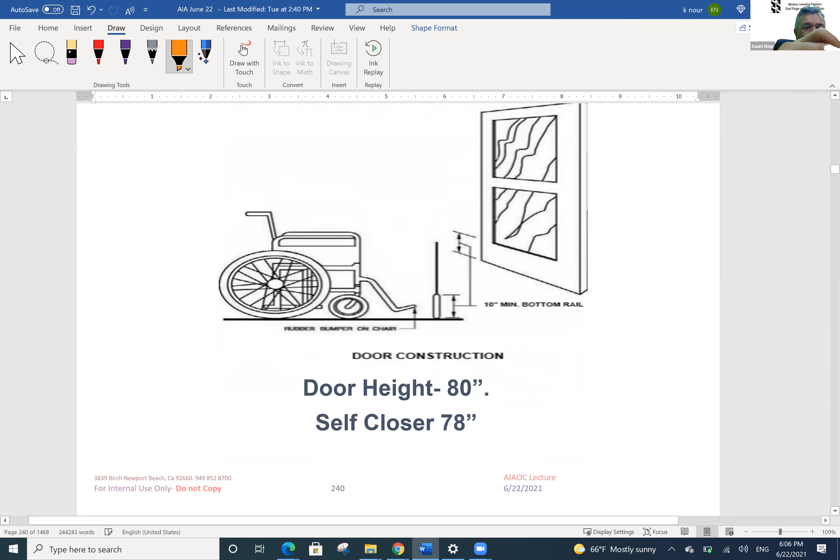We go on now, section 606. Honestly, I forgot - I'm going to look something up. I forgot when we end. In any case, you cannot shut me up, I just keep continuing until somebody stops me. I'm going to go on. But anyway, you can buy these elements because the feet will damage them, and the door will be attacked by this, if not by the foot as well as the wheelchair.

So the self-closer is allowed to be at 78 inches. The door height protector is 8 inches, but within that 10 inch zone you want some sort of a railing or kick plate because it will get punished.

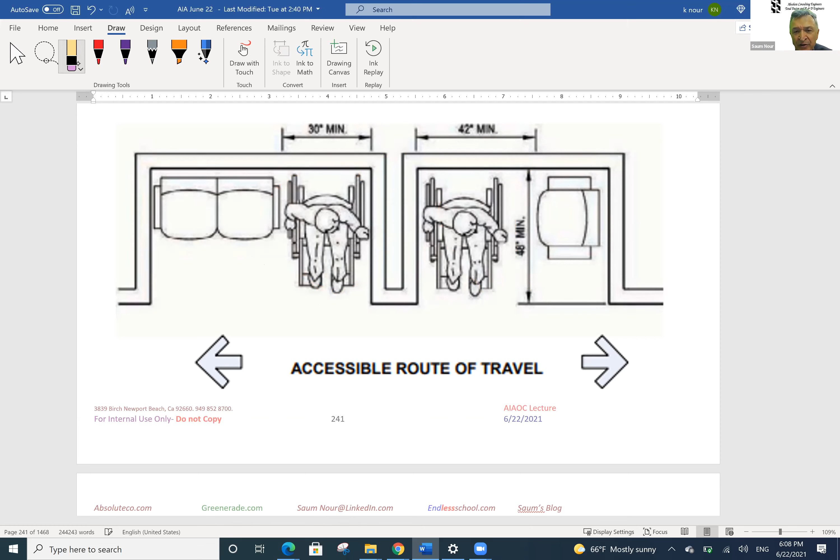Now, these are some of the basic elements I put in. Depending on the accessible route of travel, 30-inch minimum, and 48 inches in both cases for 1 chair or 2 chairs. This is just an allowable, take it as gospel - there's no explanation here other than the depth you have, whether you can squeeze in or not. If you get extra space, you got extra, but just FYI, those are the permutations. For wheelchair spaces: 1 space is 36 inches, 2 spaces is 33 inches each.

Most of these you can see at the auditorium waiting space. When I teach at USC, you can see the wheelchair designated spaces - if it's 2 spaces, minimum is 66 inches versus 36 inches for one.

Accessible routes - again, mind you, if you're approaching a chair or desk, there's another issue about access with regard to the elements that need reaching. The hand of the individual reaches a minimum 15-inch to maximum 48 inches - though that's not part of this lecture. However, the wheelchair has to be able to fit in at 19-inch minimum, 30-inch clearance. Don't forget, the actual wheelchair is 27.5 inches wide, but you need 30 inches to get in. And again, the approach is 30 inches here, and if not, you need 48 inches here, depending on different geometries.

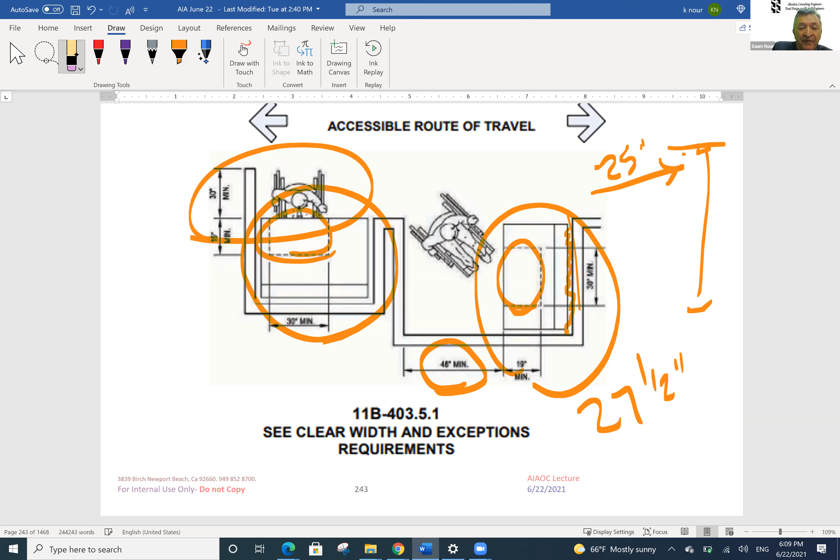Don't forget, if you would have given the poor person 30 inches, oh boy, how many four-letter words you might be stating, or goodness, they did not take Psalms class. Anyway, now when you're passing through a turn, etc., some of these do apply to stairways, which we will not get into at this point.

But if you do have 36 inches for the stairway or passageway, it increases to 60. But if it is 42, you get to 48. Now mind you, within that 36, you still have the handrail, and some structural elements may impede these pathways. This is assuming clear — the word is CLR — meaning we cannot have an artistic element protruding out, etc. So those are some of the areas. This would be the norm, and that would be the exceptions.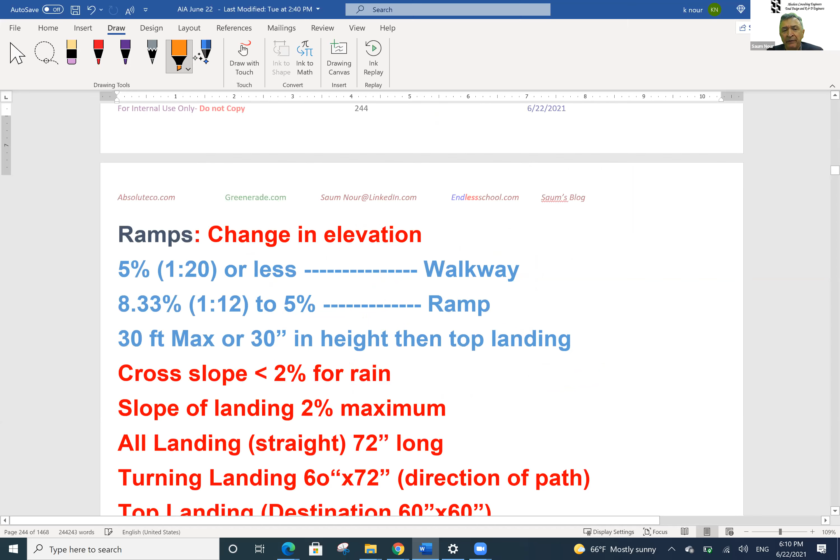Now, a ramp. First of all, any change of elevation is called a ramp. But we are going to speak about ramps right now, and we're going to be there for a while, and we'll keep going till somebody stops me. But I do want to reserve 15 minutes to go over a listing of those errors and omissions. Maybe after ramps I'll jump into that because I don't want to miss it, and then I'll come back to my slides.

Okay, now there's two parts. You have a walkway, which simply means we are going for a short distance. But if you're going for a long distance, you're talking about a ramp. A ramp is considered from 5% to 8.33%, so 1 to 20 to 1 to 12. I'll just throw this at you: at this ratio, you're talking about technically 30 feet of run.

Once you reach that 30 feet — I'm sorry, I need to take a rest — you have a place you could use to turn around, etc., or you still continue forward. The other issue is this: if the ramp is going at 1 to 12, you cannot have that flat, because if it rains, you're going to have puddles. So you can have a 2% slope.

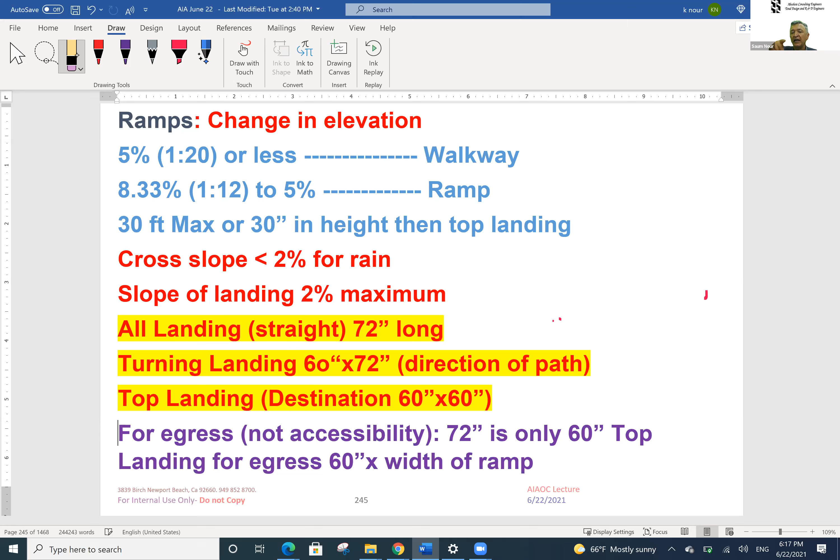Now, for egress it's 60 inches, for ADA it's 72 inches. So chapter 10, egress, and chapter 11 do conflict, and it is easier. Chapter 10 came from NFPA 101, and if you take that book, that is literally the grandfather of your building code for egress, for everything.

They should, from my point of view, just have one number and call it a day, call it 72. But for egress it's 72, not for accessibility, which is only 60 inches of top, sorry - for egress, 72, but anyway. Landing for egress is 60 inch, so for... anyway, I'm confusing myself. I'm going to give you this right here: for egress, 60 inch, you can stay. For ADA it's 72 inch on the path of travel. Sorry if I confused you.

See, that's your path of travel - that's the direction, not path of travel, direction of the travel. So if you're in the direction of travel in the path, you need the 72 for accessibility to keep the wheelchair guy happy. This is to keep the guy happy from leaving the building, right? Leaving the building - egress, by the way, when you deal with egress, the mission is right of way. Remember when we talked about right of way in the beginning? The architect designs the egress so he leaves the building all the way to the side of the road where the right of way is. That's how the code is read.

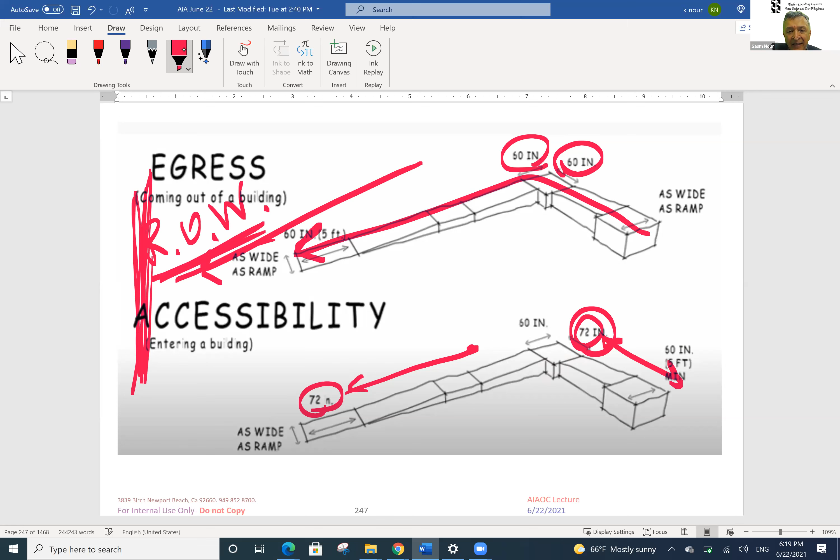So 72 inch for accessibility, 60 for that. And again, every 30 feet you have some sort of a landing - this is an intermediate landing, top landing, bottom landing, okay? And these are your flights or your runways, per se.

Now, again, we go back to what we said - I have more slides on this. You may just hate me because I have too many slides, but I felt repeating it is good. Maybe after ramp it's 6:20, at 6:30 I'm going to jump to errors and omissions, I'll come back to this. Anyway, 48 inch clear between the handrails, the rise 30 inches maximum, and every time you reach you have to have your railing, etc. Slope 1 to 12 maximum, and that's for the ramp.

The maximum cross slope on the ramp runs 1 to 48... I'm going to confuse things, I'm going to stay with my original.

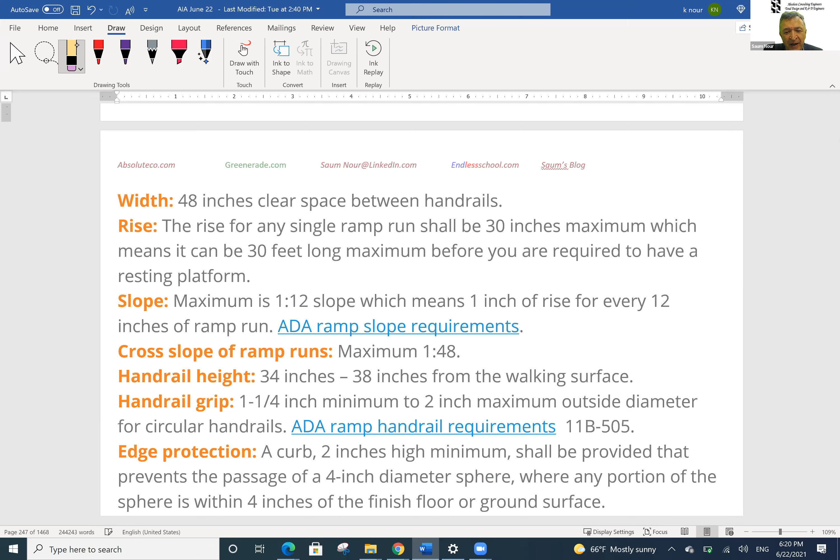Let me do this - before I see these slides, I don't want to lose my chance of going through these errors, these lawsuits. And I'm going to verify that I am sharing this. Let me see, I am there, I'm just verifying.

By the way, it is very easy for me to find this. I did this 4 years ago for an engineering group - 4 hours of lectures on errors and omissions, and I simply took some 60 to 70 cases from 2013 to 2017. Now, the beauty of that versus this seminar is that it was interactive. I would simply say what the case was, what the engineers' positions were - I had about 55 engineers there. What would be their verdict if they were the judge or the jury, how would they decide? Lo and behold, almost the majority of the time they were all wrong.

So I want to scare you to simply say these errors and omissions have occurred in new constructions and alterations. I'm just going to at least name them, okay? So these are the errors that have occurred, and please do not repeat them. Don't forget, Jacoby & Meyers likes to call, and telephone calls are free now. So let's go back.

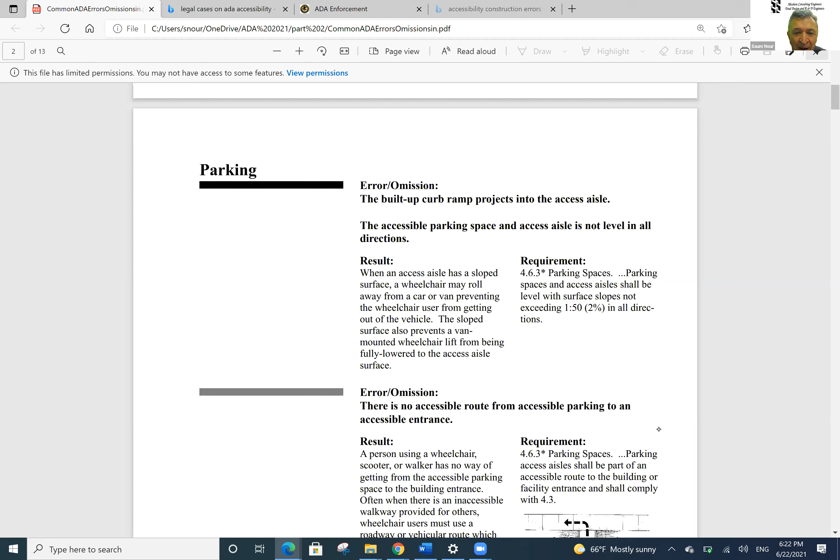Errors and omissions: the built-up curb ramp projects into the access aisle. The accessible parking space and access aisle is not leveled in all directions.

Let me go back, there's one issue you have. Don't forget, you're not creating a roller coaster, 2% is the maximum. Don't forget, what was 2%? That's quarter-inch rainfall, same as what you do on a roof when putting your roof line together - 2%, 2 feet in 100 feet, rise or run. Anyway, they did not give any format, or it was beyond 2%. Please watch out.

Errors and omissions: there is no accessible route from accessible parking to an accessible entrance. Again, one of the issues I have - majority of the time when I see the TI corrections coming in for the architect, even if they're using the hardship, they're not going to the right of way, where the bus is. Majority of the time the landscape guy has built up stuff. When I'm looking at it, I always ask, how is this handicapped person coming off the bus? The original building had it, even in 2010, but right now they've covered it up.

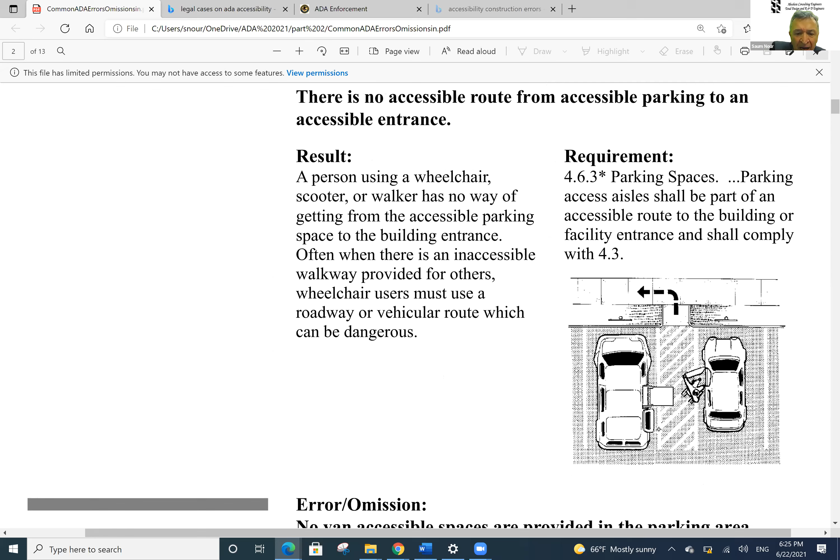No van accessible spaces in the parking. Now don't forget, you're supposed to have one minimum parking space. Up to 25 parking stalls, you're going to give them one, right? If it's one, it has to be van accessible. If you're giving the second one, it doesn't have to be. Now once you go from 25 to 50 or any fraction of, then the question is, if you're giving a van accessible space, it must have the proper spacing, about 8 feet minimum for that to happen.

Accessible route exterior: pedestrian routes on a site from public transportation stops, route accessible to parking spaces, passenger loading zones, public streets, sidewalks to accessible entrances. And I can tell you, I or any individual can go to a building and file a claim.

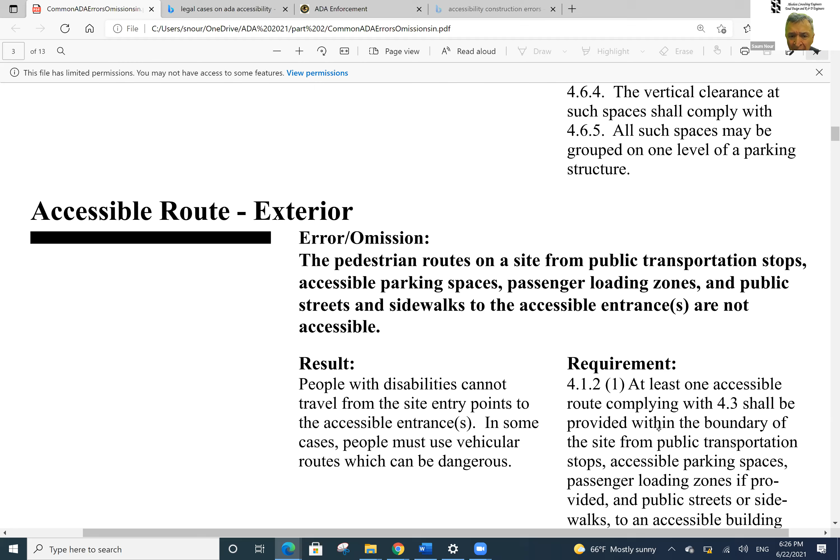Now, of course, you've got to be an attorney to do it - the ambulance chasers are gone now because the court says you have six months to do it. But as a citizen, I can go to the individual and say, excuse me, this is wrong, and I'm going to give you six months, or you can call the ADA or state ADA accessible and put the warning sign, and get a warning to the owners. So anyway, I do not see this, and it's all over everywhere I go, okay?

Curb ramp is located across a circulation path at steep, unprotected side flares. Now, I will give you right after this, when we go back, and I will talk about the curbs. The side, as soon as you have the ramp that goes down, which is 36 inches, and you have the protruded yellow curbs - those items are for the blind person.

Okay, I think I have it. No, sorry, I punched too many. It's one shot, I think. One. Okay, I got it. So what happens is this, right here, didn't do it. Hell with it, I'm not going to mess with it. So I have other slides.

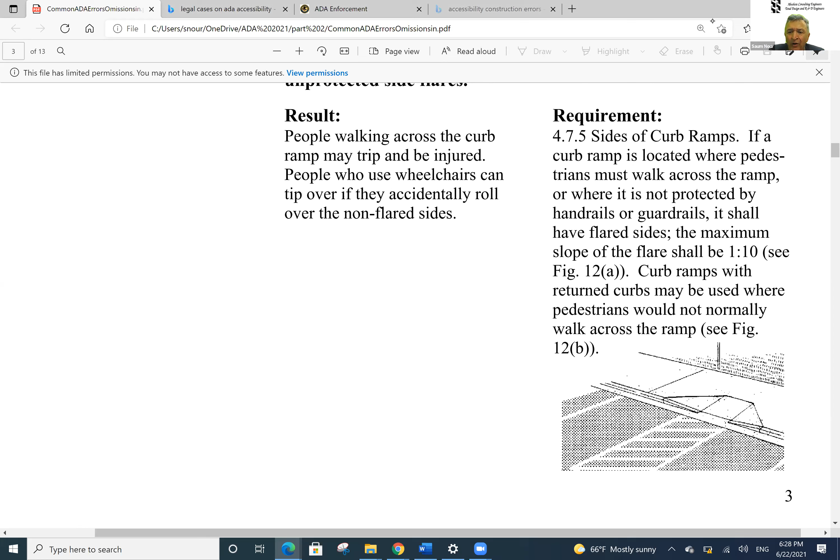Error and omission. Landing areas where the ramp changed directions, switchback or 90 degrees, is too small. Remember the 60 by 60 that was there for the landing? But instead of California, I showed you the 72 inch. But if you're taking the ADA, the ARE exam, which is a federal exam, that would be 60 by 60. So the minimum is 60 by 60, but in the path of direction it's 72, and you saw that, et cetera. Anyway, that was not the case.

It was too small. By the way, don't forget, I have seen a case in the city of Newport Beach. I'm on the Fire and Board Commission. And I've seen a case that somebody showed me where the city caught them when they put in a veneer, and these veneers were stones.

And these stones have different protrusions, different elements. Some of them are flat and some have a 2-inch protrusion. And that cut out part of their 60-inch easement. The easement was shortened by 2-3 inches.

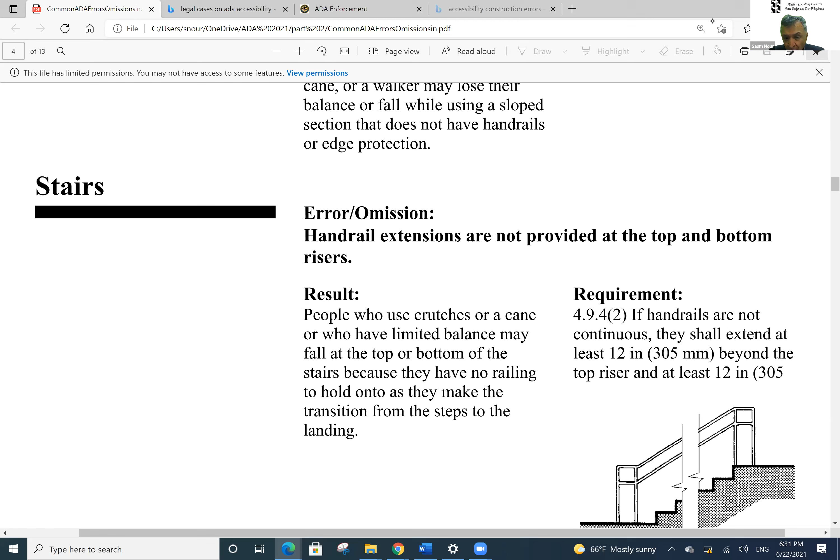Edge of the nose. The beginning of the nose and the end of the nose is your primary reference, the first nose and the final nose, okay? So from the beginning of the nose, you need 12 inches before the stairs begin, and at the final nose, 12 inches after. Those are called handrail extensions. You must have them. Apparently, they did not put it in.

I know in one of the downtown projects, I saw the welder was back. Why are you back? Ah, we forgot. They messed up those extensions. These extensions, you can see them right here, right here, right here.

By the way, my computer can do it, but I'm scared of making a boo-boo and we go in a circle, especially since this file is very, very large.

This one was, we talked about the fact that they did not have proper railing. And again, don't forget, these are cases and lawsuits that have occurred. It's not for others, we just don't want it to happen to us.

Shape of the door hardware requires tight grasping, pinching, or twisting of the wrist to use. Again, let me give you one item. All of us, God bless, will live to 120 or 150. I will guarantee you 100% that our hinges, through all of our bone system, will start hurting and we'll get arthritis at some point.

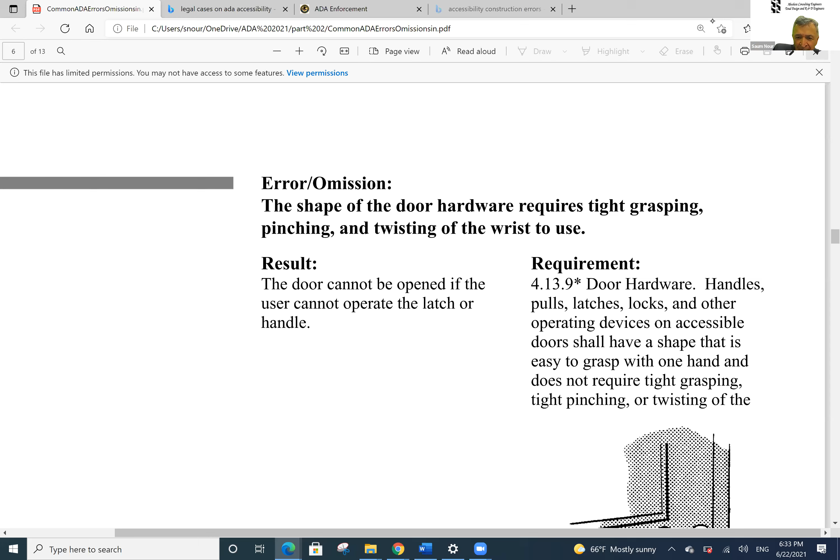So the issue is this: whether it's a doorknob, whether it's a handle, etc., remember, no grasping, no pinching, and no twisting. It has to be pure pressure with minimum pressure. Hopefully they have used WD-40 on the doorknobs, etc., so they're not squeaking like Friday the 13th. So essentially, if you do not have those hand lever operated...

I can tell you in my own case, in my own home, I bought Baldwin, and Baldwin, by the way, has a patent on the brass not to get oxidated. That's why I got it. When you're in Newport, that's what you get. So anyway, I picked it up, I bought it, etc.

The individual who came in to make my doors and the holes, etc., punched wrong. I do not have a door handle lever in my front home. So every time I got to get a tea or something, I got to put it down and add more steps. But anyway, that was a very, very expensive door from TM Cobb Doors, so I could not mess that up. I did not want to patch it.

Circulation path. Remember we talked about a person who has hard of eye vision or is technically blind. The most critical path is, as you know, all of these drinking fountains have the proper protection. Or again, in one of those high rises, I saw a giant air duct actually protruding out of the wall with no protection.

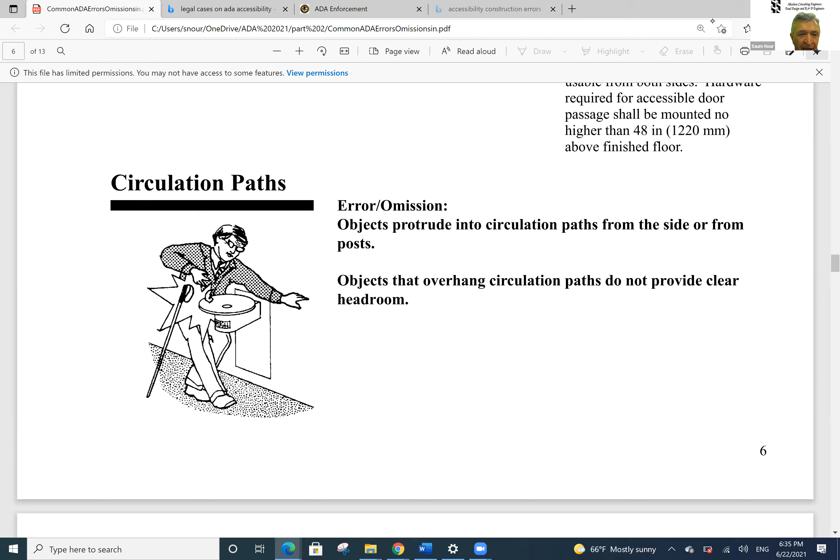And that really is bad. And again, it's a very, very large architect. Unfortunately, they're not there, or they're not taking this class. In any case, that's a passage. That was a lawsuit. In fact, since I'm the engineer for that building, I made sure that they have it.

They do have an obstacle there. I have reached a point that I'm going to ask somebody. I forgot, was it 6:30 or 7? This was 2.5 hours. Jeff, are you still there? This is Carissa, you were done at 6:30.

Ouch! Ouch! I told you guys, if you don't stop me, I'll go for midnight, and you will. I do not want to see you guys in divorce court. So anyway, all I can say is the following: I have more and more and more of these.

What I pray is that whatever I have said, maybe I have been preaching the gospel to the individuals who are working, etc. But my prayer is we do not have errors or omissions, okay? We do not want to have an extra beer or cerveza, or have a junior guy who simply cuts and pastes stuff. We do not want to get there.

That's why I believe AIA pushes it, and that's why I have to go for my other licenses, get CEUs. And by the way, because of many states, I have to take an ethics test. I believe they think that every year I become an unethical person. Therefore, I got to take the ethics test. But regardless, they don't trust us. That's why we are here.